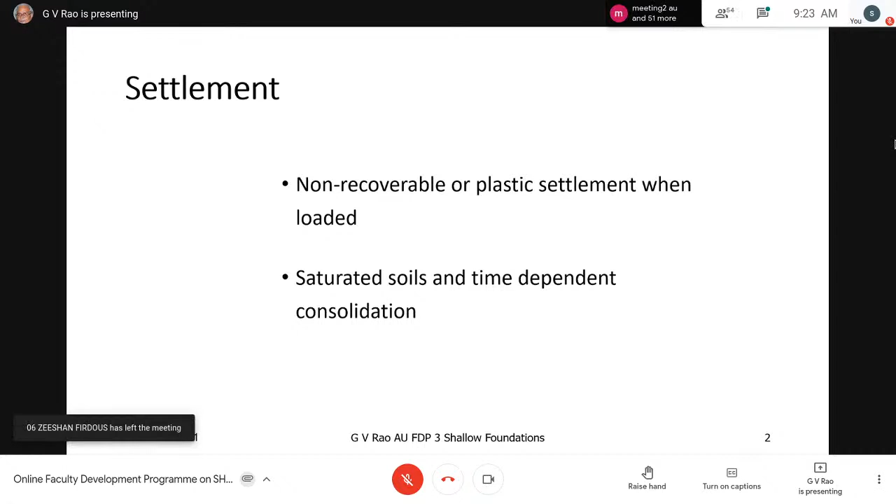So by common sense, once you start constructing a foundation on any given soil, we first have some immediate settlement, sometimes called elastic settlement. Then we also consider the long-term settlement, which by and large we divide into two portions: one which occurs due to dissipation of excess pore pressure, which we'll discuss in detail, and another part called secondary consolidation, which is more prominent in very soft clays and organic clays, which we are not focusing on today.

That means even if the soil is the same kind throughout the entire structure, we may still have causes for worry, which we have to take care of to minimize cracking and other distortion. And of course we have the classic case of the Tower of Pisa, where we know the soil below is not really as uniform as we expect it to be.

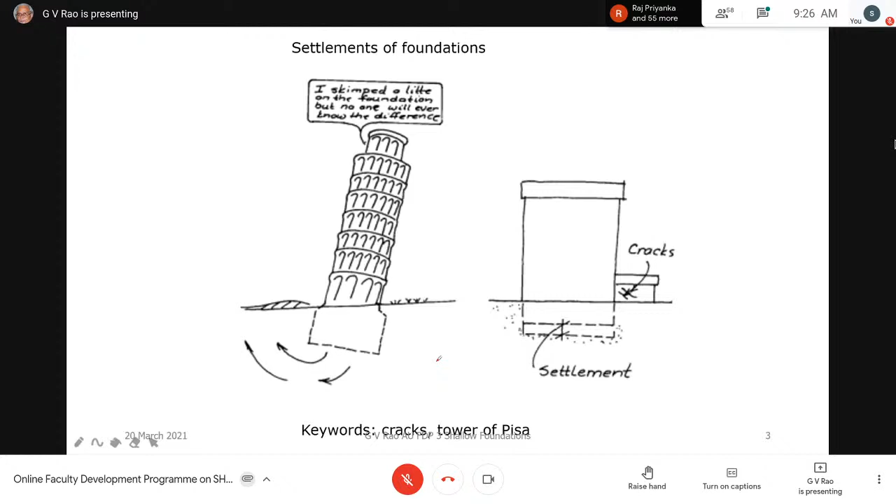So again, I am showing you the actual Pisa Tower, which I just talked about. But what we find is that in the Palace of Fine Arts in Mexico, if you just search on YouTube or Google, you will find so many pictures and write-ups on this. The point is that this structure, Palace of Fine Arts, constructed 100 years back, is still settling. It settled, I think, by a few meters. The structure itself, nothing happened, but we will see what all happened towards the end of this presentation.

So the point is that we can't have differential settlement, we can't have too much settlement either. So how do we control this? How do we make the structure as expected to be? Is it something very important? Is aesthetics important, or is the function going to be important? And is the economy going to be important? All of them will come into picture when we decide this.

So this settlement, which we normally call consolidation, consolidation really means in a saturated low permeability soil, that means obviously clays, under external loading, it is about building up the effective vertical stress by dissipating the initial excess pore pressure through drainage. Now what exactly does this mean? Once you place any load, of course our foundation in the present case, on a soft clay which is saturated, that means obviously there's a water table.

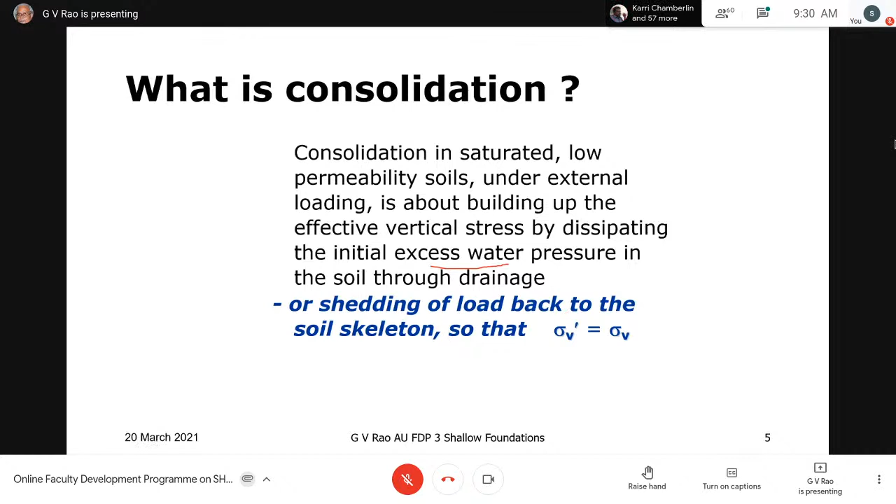The second aspect is the long-term response under constant load, that means the load has to be permanently there on the soil as foundation. Now what are the kinds of loads that are going to be on the soil as foundation? Of course, one is self-weight, the structural load, and then we also have live load, seismic load, and wind load. Obviously we want only that permanent part of the load which is going to cause consolidation. If it is infrequent, like a wind load occurring for a day or a month, it's not going to cause consolidation.

It's the permanent loads which are going to cause consolidation. In fact, the IS code defines it as service load. What is the service load element? That dead load which is going to be permanent, and part of this live load which is also going to be permanent. That means a fraction of that live load, let's say 50%, we take as a permanent load now. That means it becomes service load.

But this 50% business is not going to be true when we build the IIT library building, because library building means we've got racks and racks of books. All the books in the rack is actually only live load. But then this load is so heavy that probably in that case you take 90% of the live load as part of the service load.

This is something we have to remember now. The judgment we have to exercise is in trying to see what loads we use earlier for bearing capacity determination, and how much of them are going to be permanently placed on the soil in order to cause the settlement or consolidation. Despite the low permeability, the soil will drain, of course, over months, it could be years. We already said that, and this is going to cause reduction in the void ratio.

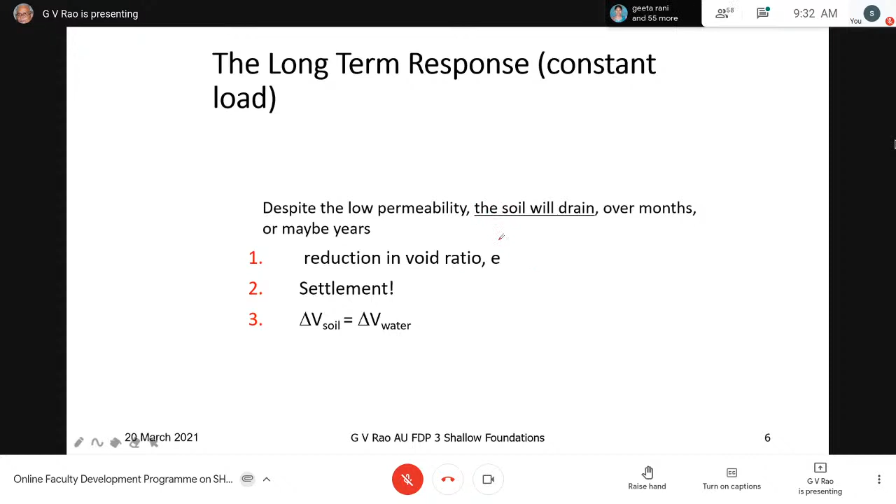Once void ratio reduces in saturated soil, it's going to cause settlement. The most important thing we have to realize is that settlement is caused by reduction of void ratio. Void ratio reduces because the excess pore water pressure is released by the actual flow of water to the outside, to a permeable layer. So the volume of water which exits is going to be equivalent to the change in the total volume of the soil element we are considering. That is going to be very important.

Now, when it's all vertical only, naturally it is leading to one-dimensional consolidation. We should realize this may not always be true, that the pore pressure dissipated in the vertical direction may also dissipate in the lateral direction. So in rare cases we also consider 3D consolidation. But one of the most common assumptions we make while using Terzaghi's theory, which we'll come to very quickly, is that we are talking of one-dimensional flow.

The water is going to flow in one direction, the vertical direction, either to the top or to the bottom, or to both top and bottom, depending on the various drainage layers. And the next thing is that it is going to be one-dimensional, meaning it moves only in the vertical direction, not in the lateral direction.

So if you are placing loads on the consolidated specimen slowly, step by step, as per a defined load increment ratio, naturally consolidation and settlement will occur. But if you suddenly place a load, the soil is not able to take it, and naturally it's going to squeeze out. The same thing will happen in the foundation also, where the squeezing out is obviously an issue of bearing capacity failure. So we should realize these two are happening simultaneously.

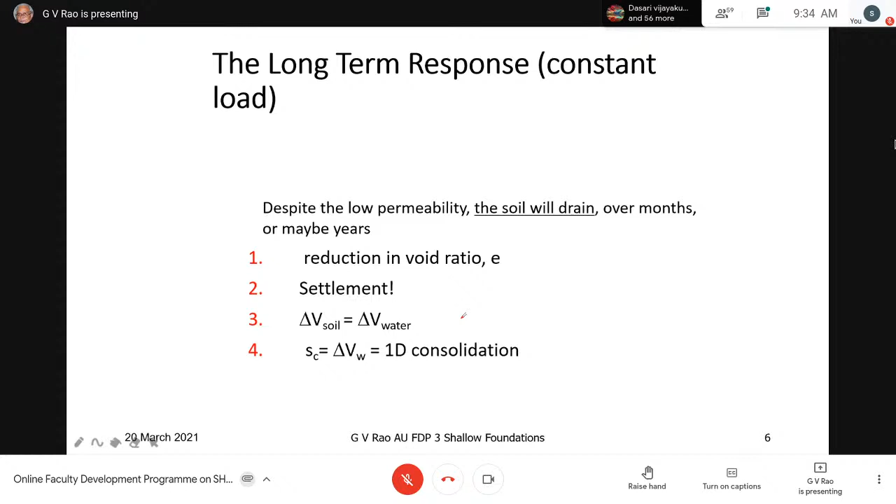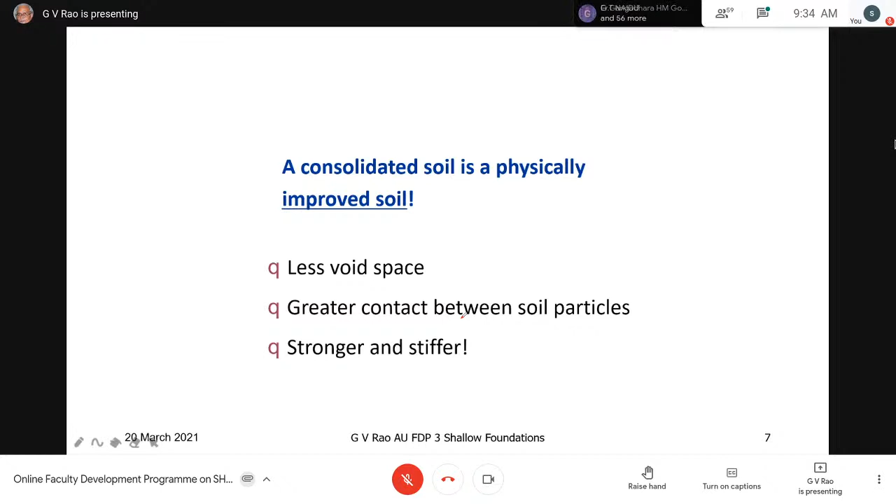Once you consider this, after consolidation, as I mentioned already, the soil is improved. It's physically improved soil. It has definitely higher frictional, higher strength parameters than it was before because it's got less void space, and the particles are coming nearer now. So loosely speaking, it's always going to be stronger and stiffer. Both are coming into picture now.

That is measured by placing the soil sample in an oedometer, or consolidometer as we commonly call it in India. Now what is the specimen size here? It's a few centimeters, and maybe the diameter is also a few centimeters, perhaps 5 centimeters or more. There are some standards specifying the size of the specimen.

That's why the consolidation test becomes most critical for all of us. Even for a standard consolidation test, it will take at least 2 weeks if you follow all the norms specified by researchers and the code of practice, the method of test given in our IS code. Obviously you can't give a result like a consolidation test in 3 days. I had an experience recently from one of the areas, very soft soil, and someone got the result in 3 days. I said, everybody gets results in 3 days now? There is no way of doing a quick consolidation test.

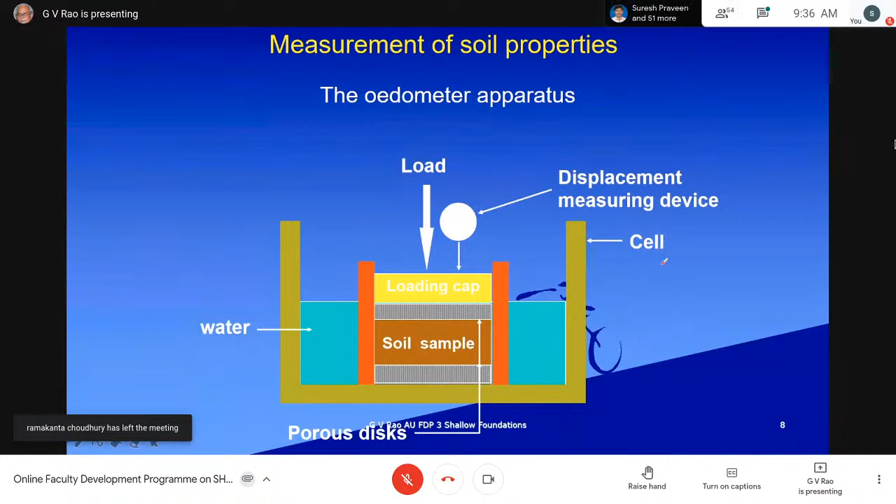Here are some basic drawbacks. Once you place the load, immediately there is pore pressure development, and slowly the excess pore pressure is going to dissipate. In the sample, if you've got porous stones on top and bottom, the excess pore pressure from the center will try to migrate towards the top or bottom. So there's an intermediate level of pore water pressure, and on the surfaces it becomes zero instantaneously. The moment you apply the load, the excess pore pressure is uniform, same from top to bottom through the middle layer. But instantly after that, because the top layer touches the porous stone, that pore water pressure becomes zero instantaneously, and then it takes time for it to dissipate completely throughout.

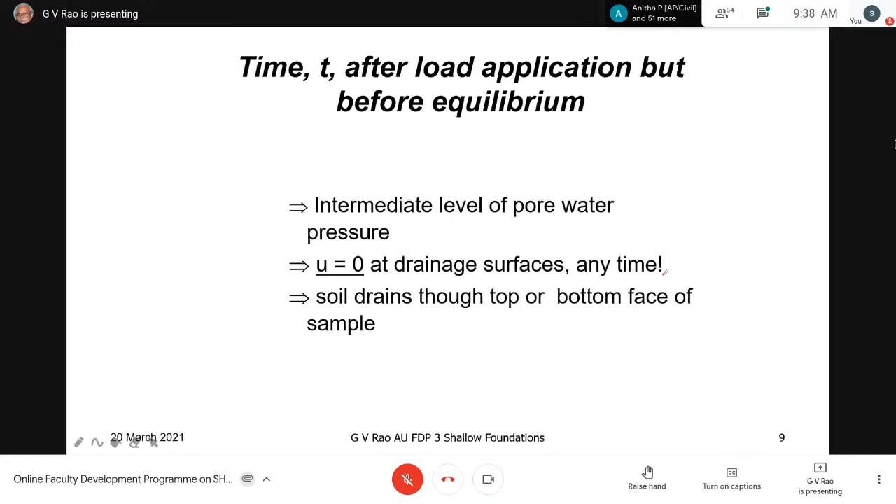So there's basically a phenomenon occurring within the soil sample unknown to us, depicted only as water goes out and settlement occurs. We're measuring settlement, not really the movement of the pore water pressure, because we're not measuring pore water pressure or the actual water coming out. We are measuring indirectly through a change in thickness, which is what we started with. The amount of water getting out causes the thickness change because we have a specified volume of sample. So the maximum drainage path is very important.

In the laboratory, we always keep porous stones both top and bottom along with filter paper, but in the field it may not be so. If you have a draining surface both on top and bottom, we say that for the middle of the sample, the excess pore pressure has to travel half the thickness to reach the top or the bottom, but in the field it may not be that way.

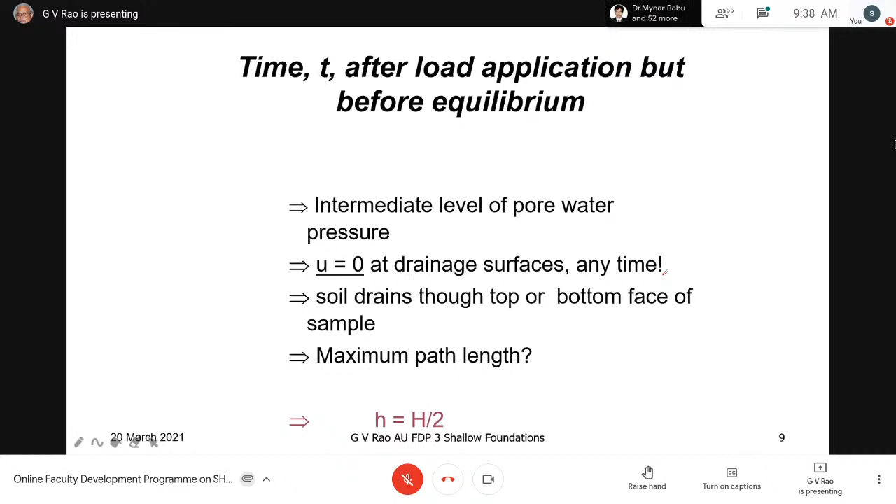Maybe you got only a drainage layer at the bottom only. So the path, the length the excess water pressure travels to get released, is going to be equal to the full thickness. That becomes also a very important point for us now. So the thickness required for actual flow of water is going to be the full thickness, when small h equals H, meaning the full height or thickness of the sample.

What information are we going to get from this test? At each stage, when we apply a small load, we are interested in the time rate of consolidation. We take time versus compression readings once we apply the load, for all loading stages, until the settlement being measured is no more there. Then we apply the second load, and then the third and fourth load increments. At the end of each load application, where no more settlements occur within that stage, this gives you the compressibility of the soil, and also through the overall behavior we can see whether the sample has been pre-consolidated in its previous history.

That means we are going to get three kinds of results from this. One is how long it takes to consolidate for a given load increment. The thickness change we get indirectly reflects the compressibility of the soil, and whether the soil has been pre-consolidated to pressures more than the existing overburden pressure.

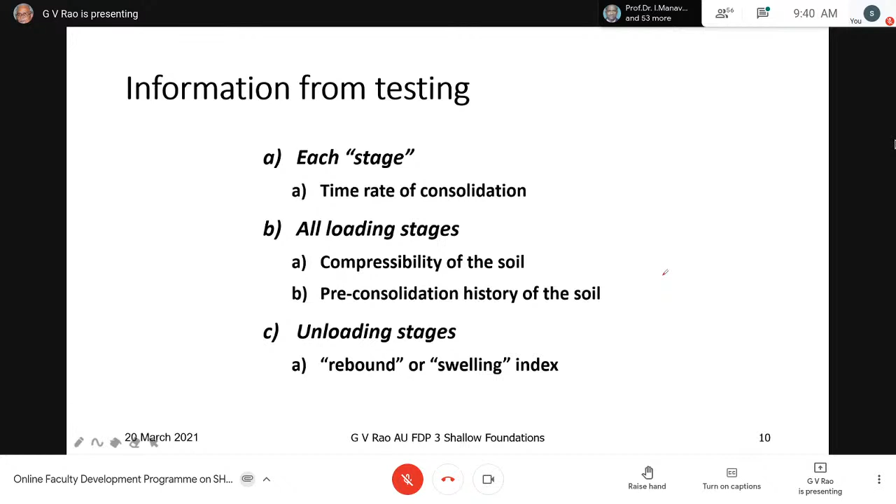In some cases, there is unloading also. After the soil at the top has been removed in the field due to erosion, the soil may start swelling, meaning it's going to rebound. The swelling is more if it's a swelling soil. In other cases, there is unloading so that the particles try to move apart. So there's always a rebound deformation which can be measured easily in the laboratory.

From the time compression results we are going to obtain what we call CV. From a fundamental viewpoint, CV comes from the theory of consolidation initiated by Terzaghi in soil mechanics. K is the permeability, MV is the compressibility factor, and gamma W is the unit weight of water. So CV is the index that tells us the time rate of consolidation, and that is the most important parameter to understand the time effect situation.

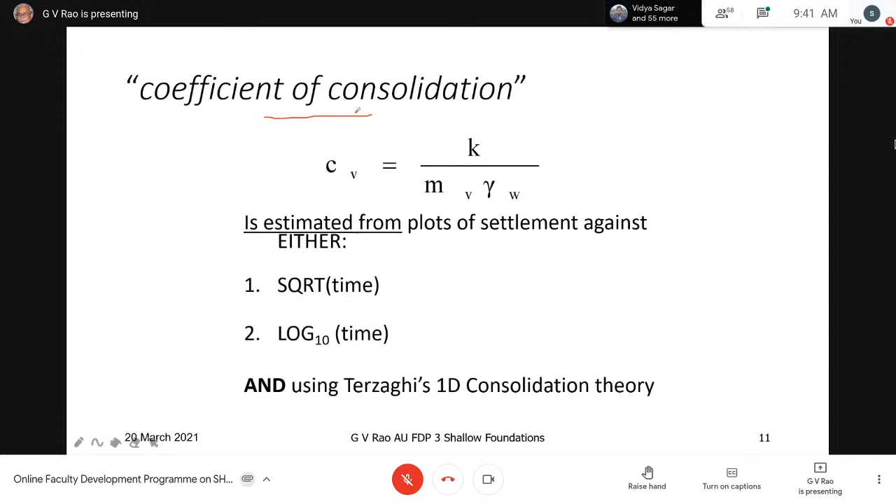There are people who use the square root of time method and the log time method. Most common is square root of time, and log is also used. The log method is used when the soil is very soft and when you are likely to have secondary consolidation also.

So what is happening now? The results can be plotted in different ways - this is the actual data directly. When you plot the data, we are plotting the root of time versus the compression readings we get. The readings are just plotted - you can see 5.500 like that, something is plotted. From the instant of loading, we are measuring the compression, the dial gauge reading.

We plot the root of time, not directly against time, because that is a phenomenon observed in theory by Terzaghi. So we start following that, drawing a straight line - I assume you know the details. We draw a line inclined at 15% more, and wherever it cuts, that gives us the time for 90% consolidation. So there's a geometrical way to obtain this value of time required for 90% consolidation, by this technique you can say, and the same applies for the log method also.

Both these methods have a relation with respect to theory also. Sridharan from IISc, who was my supervisor, brought out a new theory wherein we can also predict using hyperbolic relationships. These are classical ones. We can do an equilibrium prediction using hyperbolic information. The advantage is you may not have to really do the whole testing, so there's an advantage in the system.

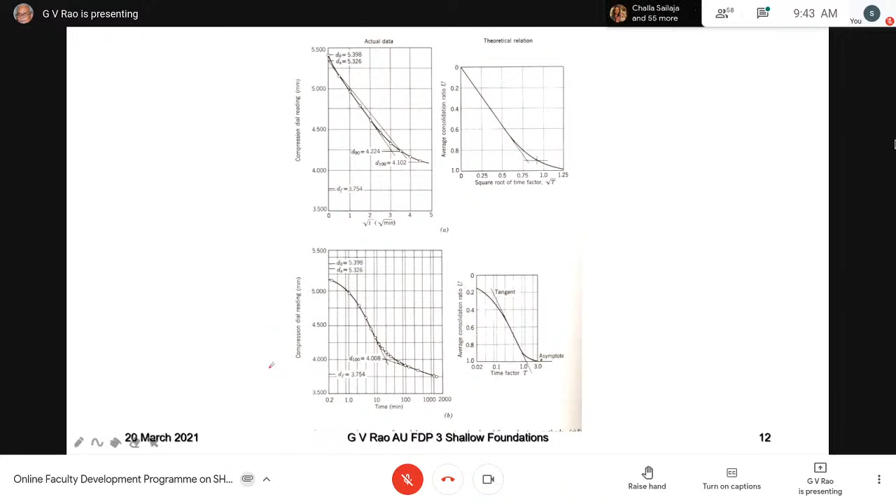By this process, using T90 or T100, we can obtain the values. The time factor comes from the theory of consolidation. T is time for a degree of consolidation which you require—say if it's 90% consolidation, then the time required for that. H is the thickness of the drainage path we said earlier. So from this, knowing T from theory, we can get the value of CV.

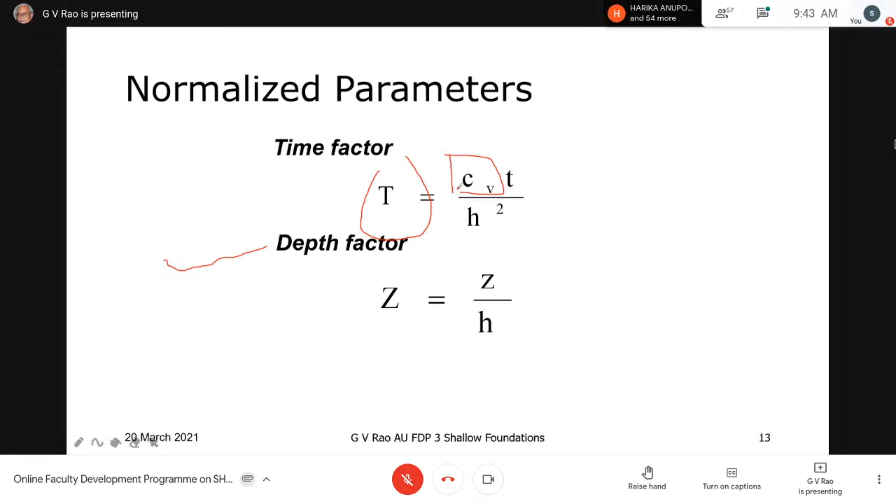This is most important for all of us to understand the time relationship between the settlement or consolidation in the field, which we expect. I already mentioned that H depends upon the length of the drainage path. So the next thing we are going to look at is basically coming out from this.

From this kind of test, we can also estimate, naturally, at the end of each load increment, the amount of settlement. For each load increment, we are going to get the settlement. That is what we use to begin with, but you use it with theory also. We'll come to what theory we are going to use for this.

The theory says that the moment you apply any load on a system, we are going to have settlement—we call it immediate settlement, or elastic settlement. It takes place during or immediately after construction of the structure. It's also known as distortion settlement, as it is due to distortions within the foundation soil. In the laboratory also, distortions do occur. So what we are looking at is immediate settlement, which is obviously elastic in the case of sands—that may be the only settlement which occurs there.

The second thing is consolidation settlement, which occurs due to the dissipation of excess pore pressure—meaning gradual expulsion of water from the voids in the soil. That is obtained using the experimental data and the consolidation theory propounded by Terzaghi.

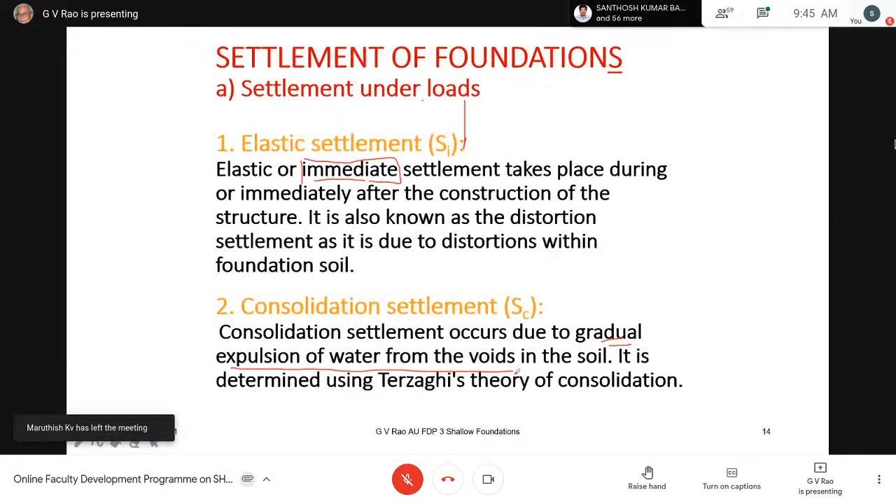The third aspect: in some soils, consolidation is not the end of the primary—that's why the earlier one is called primary consolidation, and more often this second consolidation is called secondary consolidation. Even if the excess pore water pressure becomes zero, settlement continues. Some say it's due to creep; some say the secondary consolidation movement is still occurring. This is not always significant—it's insignificant for normal soils, only significant for organic soils. Most theories are not applicable for organic soil, so we deal only with inorganic soil.

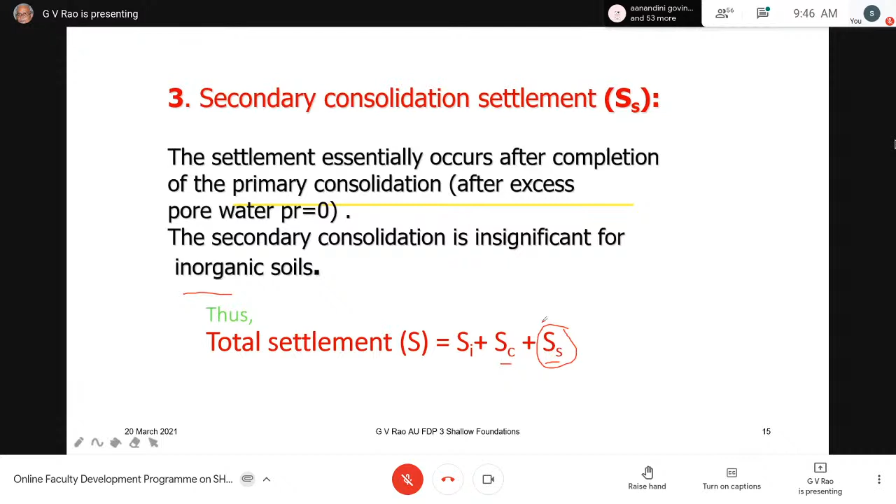Theoretically, total settlement is simply the addition of the immediate settlement, the consolidation settlement (primary consolidation), and theoretically secondary consolidation, which we don't normally consider since we're not dealing with organic soil. So we only have the initial or immediate settlement and the consolidation settlement. But there's also scope for settlement due to many other causes.

In some cases these other causes may exceed whatever we already thought—it could be collapse of the soil. There are certain kinds of soils called collapsible soils, so unless you're dealing with them this may not occur. Also, sometimes underground erosion or piping can occur below the foundation, and it also occurs due to lowering of the water table.

Lowering the water table actually increases the effective load on the foundation soil, and that can cause settlement. This can be theoretically calculated, and most of you who are teachers give questions on this for assignments or exams also.

Sometimes thermal changes cause issues too. Suppose we have workshops producing heat - the water is going to evaporate, and there's a problem. In other cases, consolidation will not occur if it's cold storage.

Also due to subsidence of the total area - in places like Dhanbad, due to excess mining done below ground level, the entire city or township is settling. This is called subsidence. It can also occur in cities where there are cavities due to removal of lime by action of rainwater and carbonation, sometimes causing lime caverns. In a place like Delhi, caverns were found just below the road.

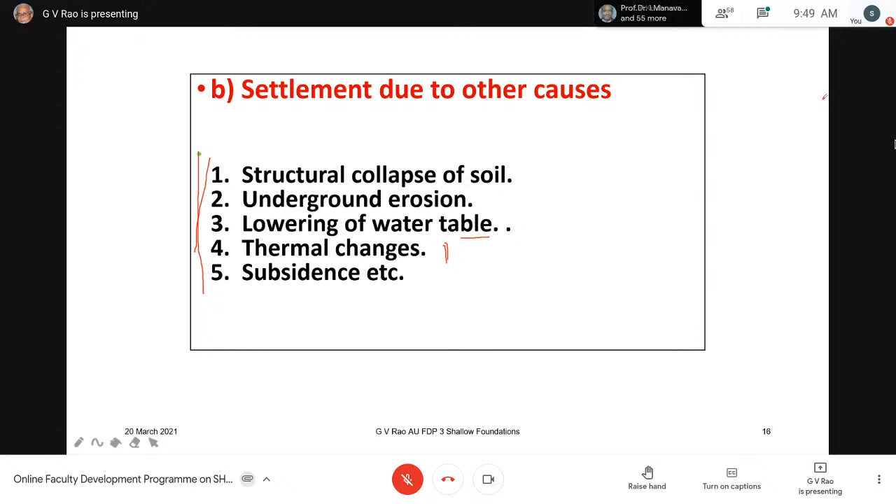And it is due to these and many other reasons that whatever value you calculate by any theory may be off the mark by sometimes 2-3 times. That means the settlement you calculate by theory could be much, much less or much, much more than the actual observation.

So the result you get by taking settlement readings of the soil sample in the consolidometer - we can plot this with respect to what we applied, the effective consolidation stress, because we take the measurement of thickness at the end of loading, at the end of consolidation of the loading. That becomes the effective stress or effective consolidation stress.

In the other direction, we talk of strain - that means settlement divided by thickness. That's one way of doing it. If you plot directly like this, the curve will be something like this. But very rarely do you plot this way.

You always plot the effective consolidation stress versus void ratio, which is easier for us, because that's easy to calculate the settlement. When you do this, you get a kind of curved behavior. Mind you, this is not always in linear scale, it can be in log scale also. So if you plot like this, one axis is percent consolidation - percent vertical strain - and the other is void ratio versus effective stress.

So that is the kind of picture we are going to get. We can have a direct kind of behavior, or we can plot versus the log scale. Mind you, the picture I gave earlier is on the linear scale actually, so this curve we get is definitely curved.

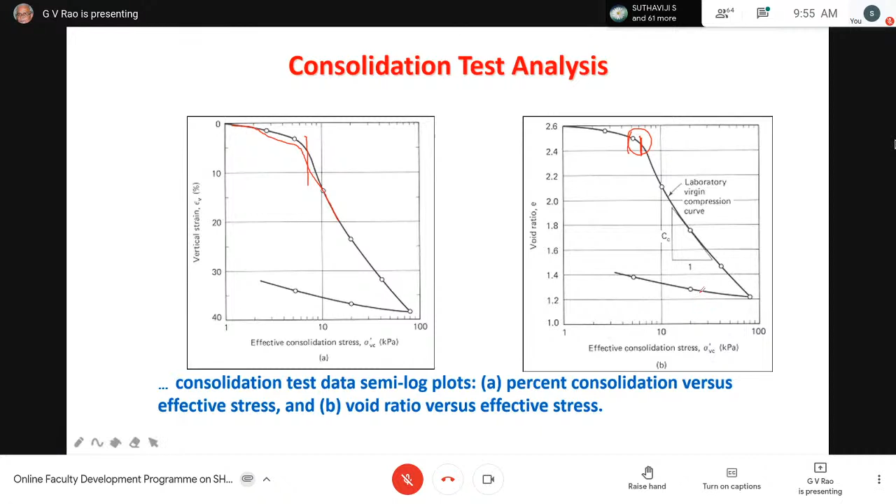First time the loading is applied - this change is what we want to find out, and this is what we define as the pre-consolidation pressure. So we get the slope of this portion, and we also get the rebound values in terms of CC, MV, or AV, whatever it is. The point is we get the total consolidation behavior - how much settlement will occur at what kind of loading - from this e-log curve, and that becomes the basis for all our work.

So when we plot the same thing now, without much consideration, I have taken a sample from here, at this pressure. Now I know from calculations of the loads which are going to be placed on the foundation, and the stress coming at the level of the layer of soil which is going to consolidate. Once you calculate the additional stress that's going to come because you placed the foundation, the stress could have become this much.

Going back on this line, earlier the void ratio was this much because that is the existing overburden pressure. You are going to apply additional load now because of foundation construction, up to this. So the difference between these two values of void ratio is simply giving me the strain, delta H over H. H is the sample thickness in the lab. In the field, H represents the thickness of the strata, and delta H is going to be the settlement.

By just looking at the change in void ratio between these two pressures and knowing the value of e naught, the initial void ratio we started with, we are able to get the value of delta H by H. Multiply this value by H and we get the thickness change, or consolidation.

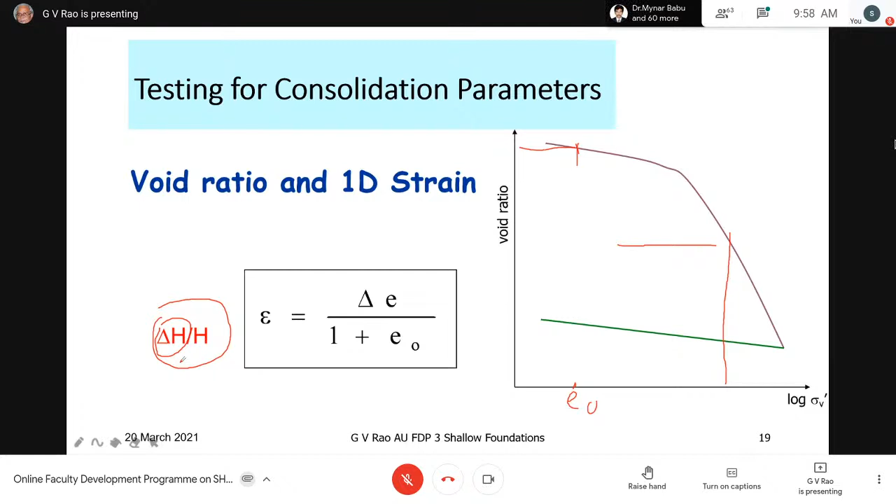There are no more values required. I just need the e-log curve. The other way of looking at it is I can also get the initial values before the so-called pre-consolidation pressure, and CC as well defined here. So all of these can be obtained by the indices, by the slopes.

So in this, we come back to our definitions. What comes out of these curves is a reflection of the stress history of the soil, the stress history of the clay. We're talking of NCC, meaning normally consolidated clays. We can have normally consolidated clays, over-consolidated clays, and also under-consolidated clays.

To begin with, a normally consolidated soil is one which has not been subjected to a pressure, an effective overburden pressure, greater than the existing overburden pressure. That means if the soil has been laid by sedimentation geologically, and the layers remain there for millions of years, each layer is going to be normally consolidated because it's subjected to consolidation under the existing effective overburden pressure. So all the layers are going to be normally consolidated clays.

In the other case, what happened? Probably geologically, the soil has been sedimented, each layer is fully consolidated because millions of years elapsed. But due to geological changes now, maybe the top 100 meters is eroded.

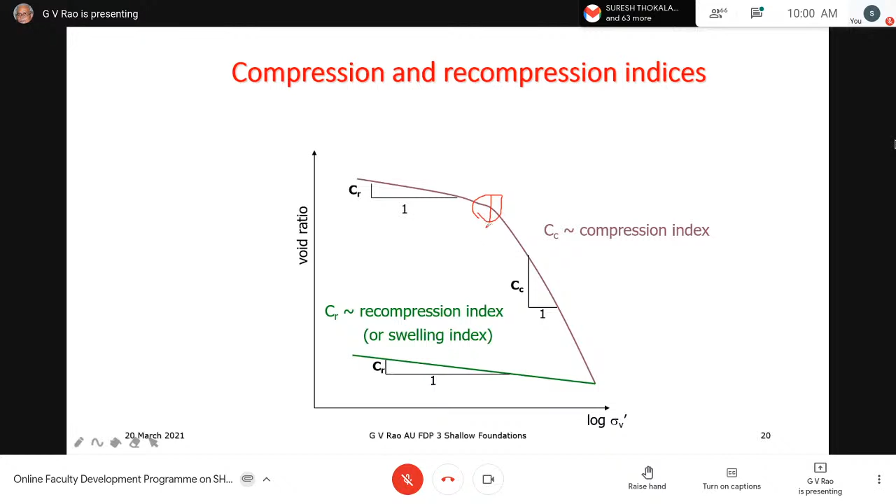We'll come back on this again. So this is what we're trying to say. This sample has been stiffer up to this layer, up to this part, and then has been softer beyond this part. So this is the pressure which is obtained as what we call the pre-consolidation pressure. Now higher is this pressure, naturally, the soil is going to be more over-consolidated.

We'll see that also. So then we come to the third aspect, which is not used actually, but in offshore structures this becomes very common in fact. So what is happening is, under-consolidation occurs in soils that have recently been deposited.

I will give a small side story. When we were investigating the offshore deposits of gas, both in the Krishna and Godavari basin, which are now very popular sources for all our gas, when the investigation was going on, the initial vehicles, initial ships, initial barges which were investigating, they were only barges to investigate the soil profile. What was happening was the strata at the bottom of the river, the seabed, was sort of flowing.

What do you mean by the soil strata flowing? After all, the strata was only at hardly an inclination of 4 to 5 degrees. That means a slope angle of 4 to 5 degrees, or less than 10 degrees, was actually moving like a slide. If you go back to the history of this, try to see how much sediment is coming out of the mouths of Ganga and Brahmaputra near Calcutta or near Bangladesh.

Near the boundary between these countries, what we find is that the amount of sediment coming out is something like 500 million tons, 550 million tons per annum. This much sediment is coming through the mouths of both Ganga and Brahmaputra. The nearest value to this is 350 million tons in the Gulf of Mexico. That means we have the largest deposits of soil sediment coming into the sea.

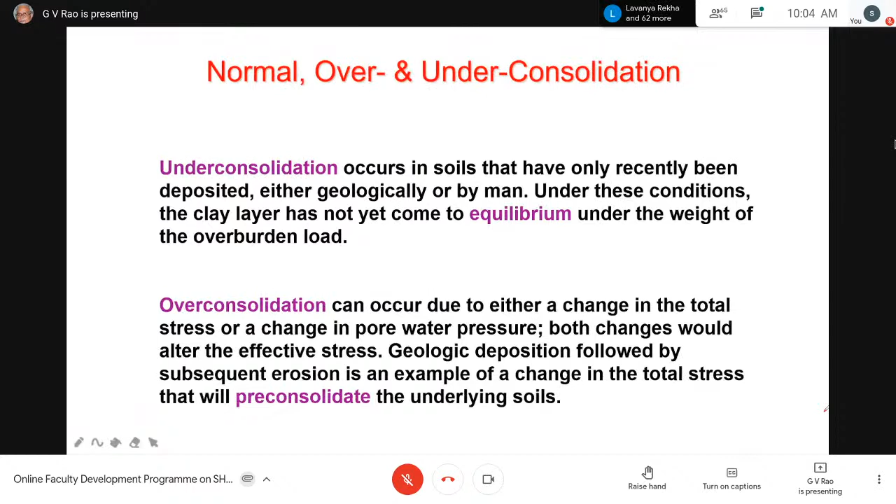So over consolidation can occur due to either a change in the total stress or a change in the pore water pressure. Both changes would alter the effective stress. So geological deposition followed by subsequent erosion is an example of a change in total stress that will pre-consolidate the underlying soils. If the line is only one single line, the soil is essentially a normally consolidated clay. If there is going to be a slope change, that shows the soil is over-consolidated, showing the pre-consolidated pressure.

One thing we should remember is that normally consolidated clays and over-consolidated clays are not different types of clays. They are the same kind of clays. It's only the condition of the excess water pressure dissipation which causes pre-consolidation to occur.

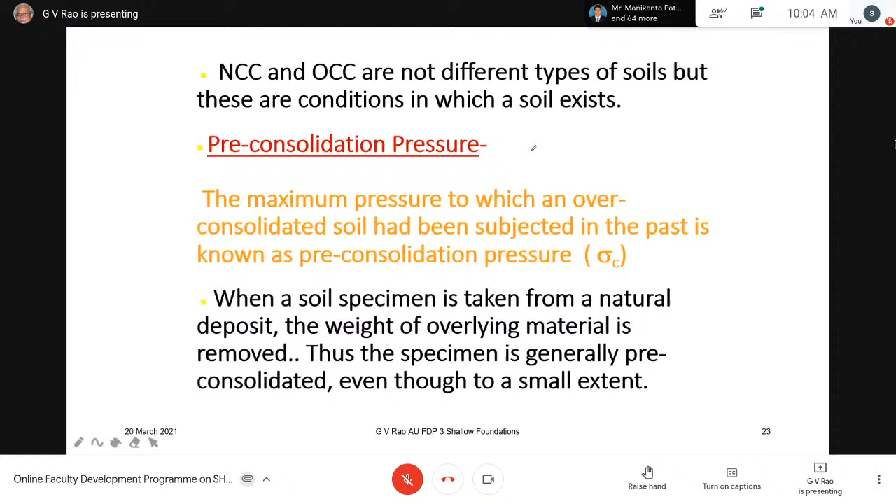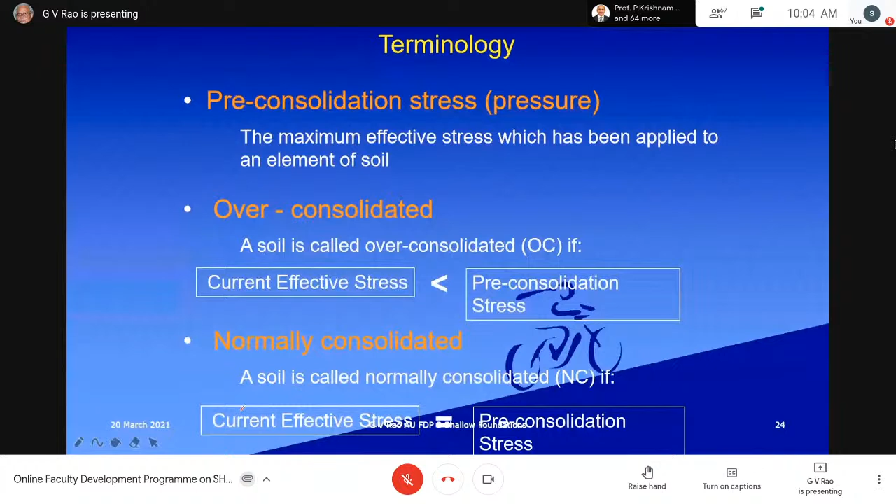The maximum pressure to which an over-consolidated soil had been subjected in the past is known as the pre-consolidated pressure. Pre-consolidated stress is the maximum effective stress which has been applied to the element of soil. For over-consolidated soil, the current effective stress is less than the pre-consolidated stress, and it is actually consolidated at the current effective stress. So pre-consolidated stress equal to effective stress is just a single line.

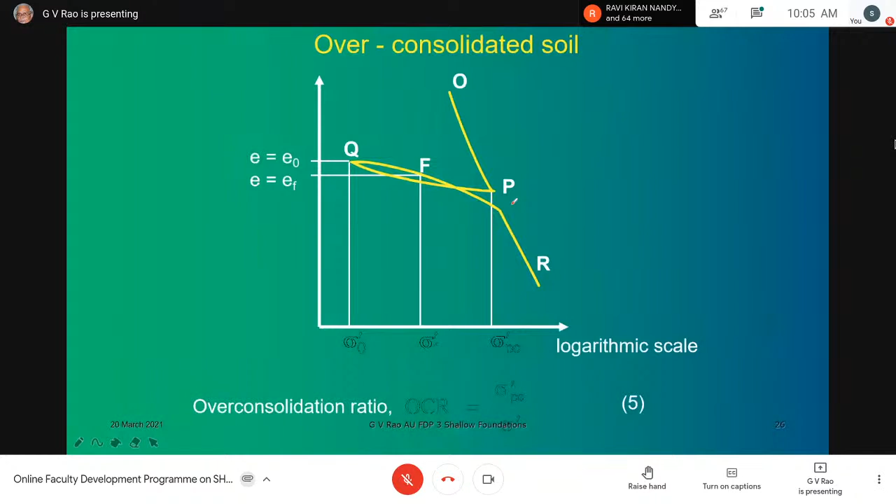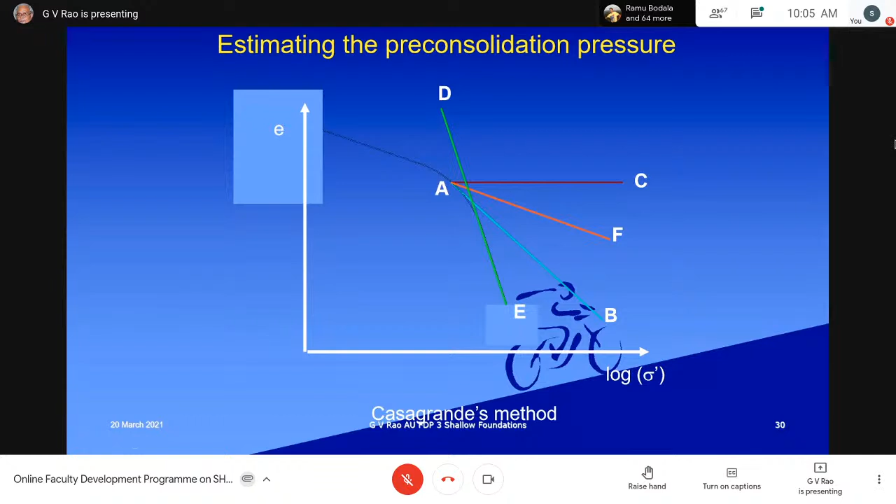This is the basic issue we are considering, and there are a lot of methods to do this, like the Casagrande method and others. All of you are familiar with those methods, and we can decide upon this. In fact, the best way is repeated testing, not the conventional way. But there are simple methods to obtain this, and as teachers you're familiar with these procedures, which are all empirical procedures to define these values.

We already defined the pre-consolidated stress, which means if your present loads are lesser than the pre-consolidated pressure, you will have lesser settlement. If the present load imposed due to construction of the foundation is more than the pre-consolidated pressure, naturally the settlement is going to be more. This is something we have to do, it's not in our control, it's a structure which we make. If the structure demands higher stress, we are exceeding pre-consolidated pressure and settlements will be more. If we are below the pre-consolidated pressure, the settlement will be less.

Yes? Any doubt, sir? Nice presentation. Hello? Nice presentation, sir. Are you able to hear me? Yes, sir, nice presentation, thank you.

So then the coefficient of volume change, we have already defined MV and other things, we are familiar with this. Basically AV is the slope of the line between void ratio and pressure, and AV divided by (1 plus E naught) gives MV. So they are only a simple relationship based on the slope.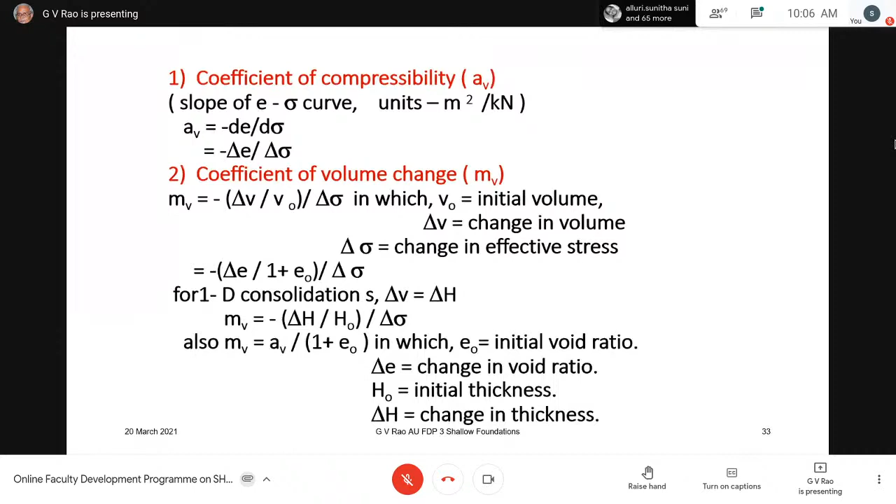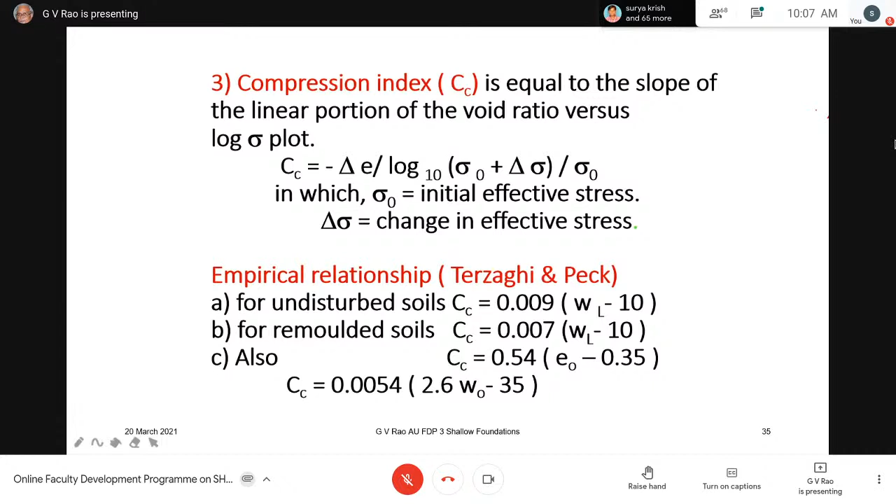After having got this, we can calculate using the plot as mentioned. We also find, as noted in our report, that if you can't conduct a consolidation test, for preliminary estimation purposes we can use available relationships. This is as old as three or four decades back, where CC equals a function of liquid limit, and also a function of the initial void ratio. Many such relationships exist, but I advise against using these because they are pure empirical relationships, and we can't use them for submitting settlement calculations for the present structures we are estimating.

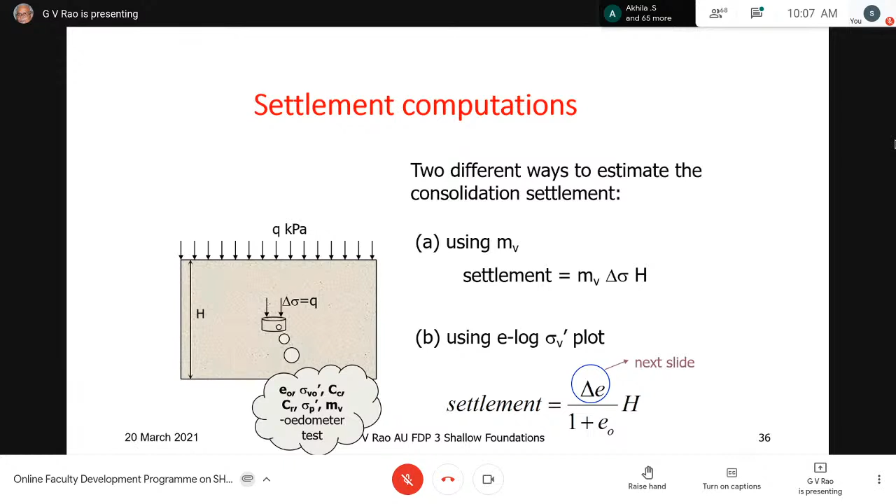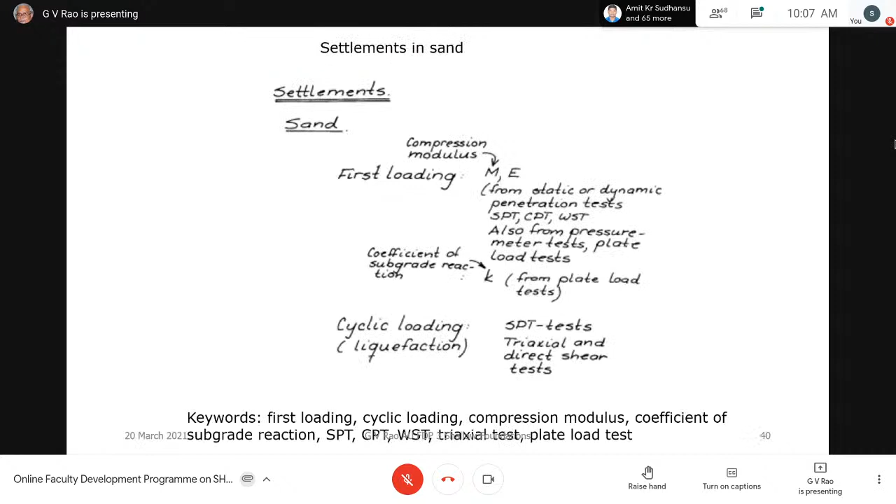These are pure guidelines only for guessing initially what kind of work we are going to do. So then, as I told you, we can use the equations or directly use the void ratio change and calculate this. We already said that for NC clay, settlement is a combination of initial, primary and secondary settlement, and all of these are well known today. We'll quickly skip to that.

Then comes calculating the stress change. To calculate stress change, we can use theories like the Boussinesq theory, the Westergaard theory, or the Burmister theory. But whatever theory we use, fundamentally the load placed near the surface of the ground is going to distribute in the form of a bulb, so this entire soil is going to contribute to the settlement.

Depending upon the situation, the thickness of the soil, which is the main influence, is going to be varying. It depends upon many things, including whether it's a spread footing or a strip footing. We can really try to see the influence of this.

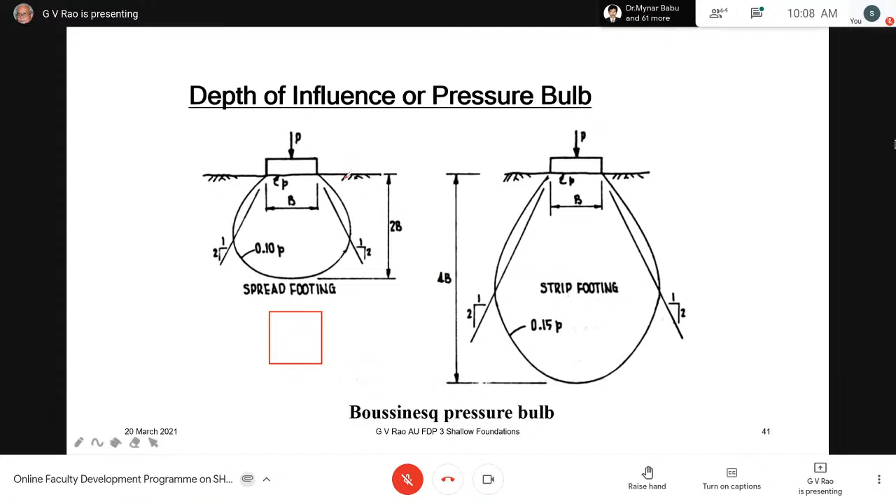If it is a strip footing, we find that the influence is going down up to 4B. In the case of a spread footing, it's only going to 2B, where B is the width of the footing. You can also calculate and prove these yourself; you don't have to go by theory only.

But it's difficult to calculate the bulb because the shape is not so clear. So people assume the distribution occurs in a trapezoidal form, and 1:2 is a very common way of doing it. If it is a spread footing, it's spreading in all directions, so B becomes B plus Z, and L also becomes B plus Z. The same thing happens with strip footing.

A strip footing, as you know, is something like a plane strain - we will see that later. The point is that one has to consider this kind of distribution for simplicity, though this is not perfect.

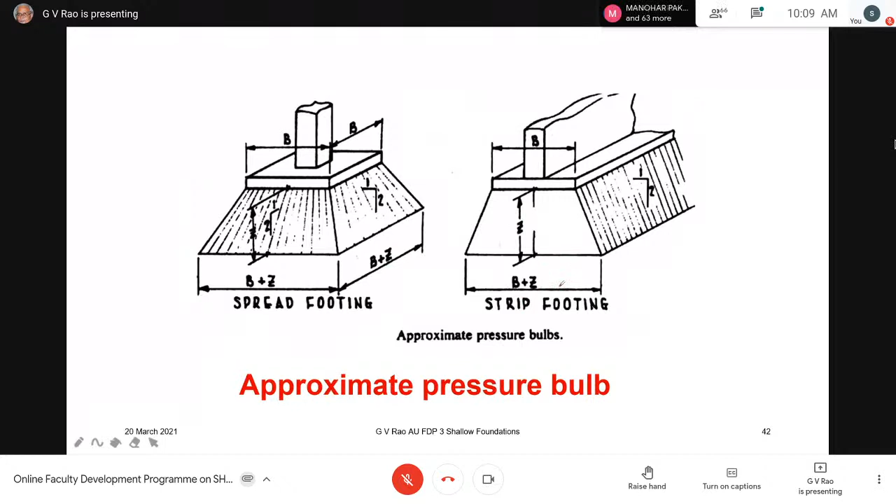Once you do this, if our layer is somewhere in between, we will find out what stress change is occurring here.

Another important thing to always remember: if the foundations are small like this, the zone of influence is going to be this much only. If you have a large foundation like a raft, the zone of influence is going to be so much more. So having small foundations quite near each other is going to influence the settlement in a major way.

If you calculate individual settlement of each column or each foundation separately, it is actually wrong, because they are so nearby that they will act together to cause settlement in the entire pressure bulb.

In the same way, in stratum 1, there is a distribution, and the top portion of it is going to be nearer the foundation. We will have a thicker layer and a thinner layer, and as the stress decreases going down, maybe I'll have a thicker layer here for calculation. So it's never calculated as though it's going to be one single layer - it will be divided into multiple layers because the relationship is not linear.

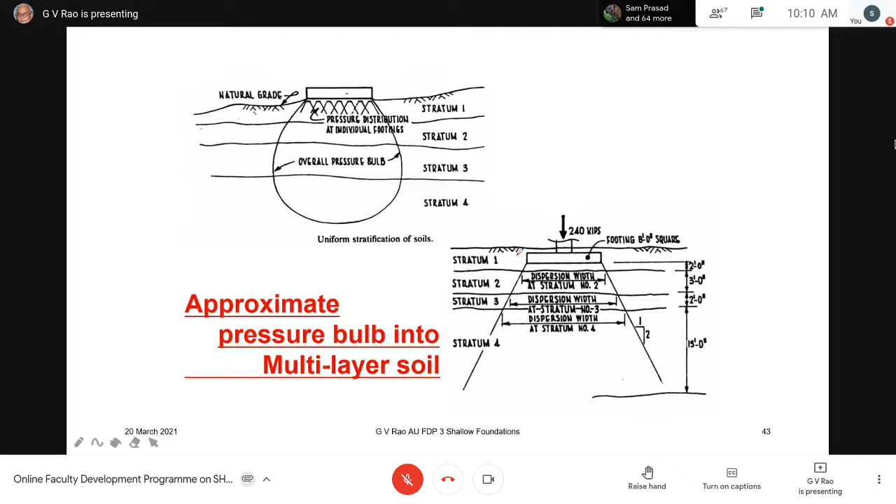We should divide them into multiple layers so that we get an accurate value - that is most recommended. I'll repeat: the layers nearer the bottom of the foundation are always assumed to be thinner, and as you keep going down, we can assume thicker layers, even if the soil is the same kind.

This obviously means we are going to have consolidation data for each of the kinds of layers present. Stratum 1 in this case might be sandy soil, but stratum 2 could be different from stratum 3 and stratum 4, so we ought to have consolidation data in each one of the layers. Just taking one sample in one stratum is not going to give an indication because these soils are very different - for the same borehole, you have to do a number of correlations to get a field value.

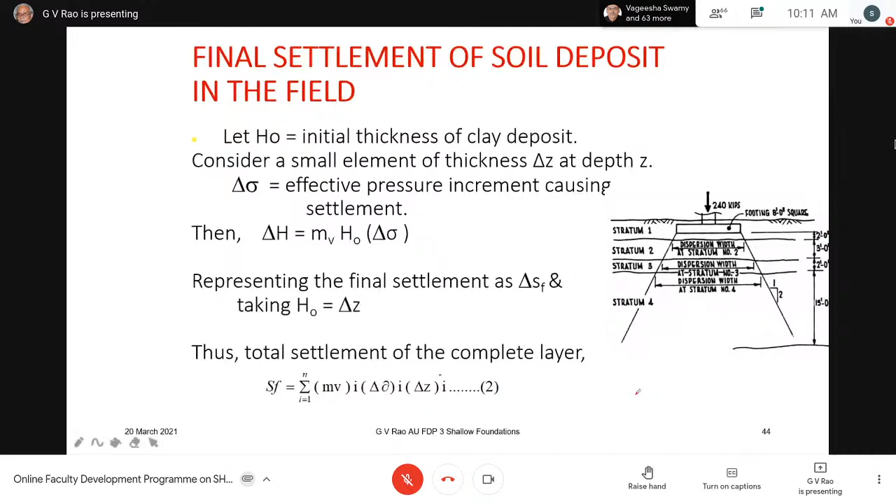So then we can always calculate what the settlement actually is, by elastic settlement or vertical settlement.

So that initial or immediate settlement is going to be a function of the kind of load you are going to have, the width of the foundation which you are considering, mu of the soil, the modulus of the soil, and the influence factor which is going to be considered. The influence factor comes from elastic theory, and mu we are going to assume.

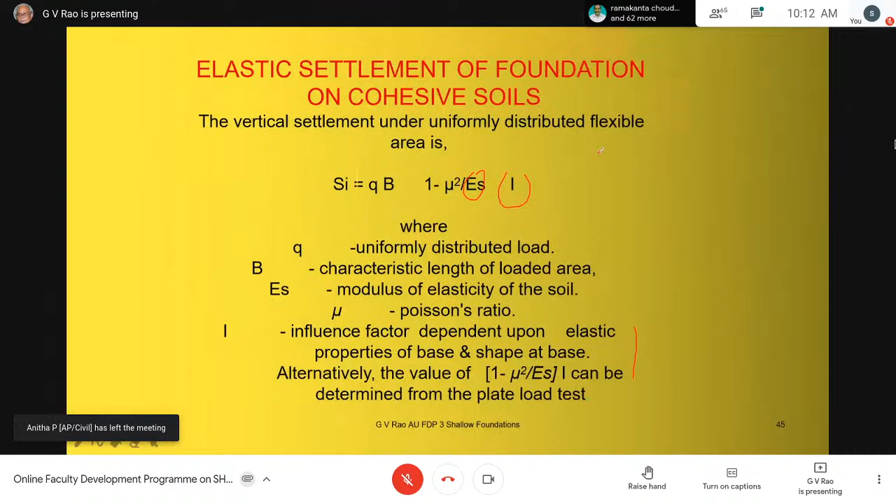E, of course, we need to conduct a triaxial test to find out the slope of the line for each confining pressure. Q is something we know, and B is what we're assuming to begin with. So the vertical settlement can be obtained using this formula, and of course our standard, IS 8009, also gives you these values. So this is a common reference to all of us.

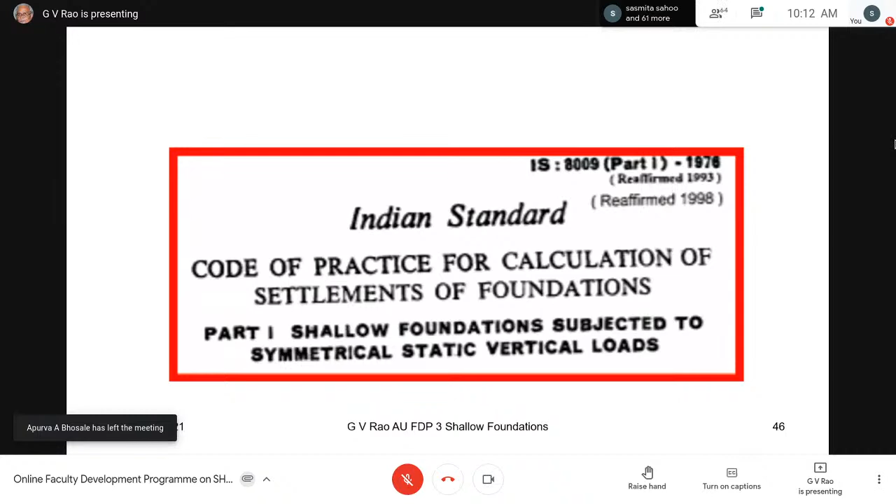It's being revised continuously, and we can calculate the settlement based upon the DCP, dynamic cone penetration test, also. We can do it using many other things, like SPT also. For this, if you're using SPT, these are the curves.

Probably you're familiar with these curves also. On this axis we have the width of the foundation, and the settlement for different kinds of foundations. This is again on the log scale, you should realize this. The vertical axis, settlement, is on the log scale, and the correction factor for water table is also given clearly. What is important is that this is 10 to the power minus 1 and 10 to the power minus 2, settlement in meters per unit pressure.

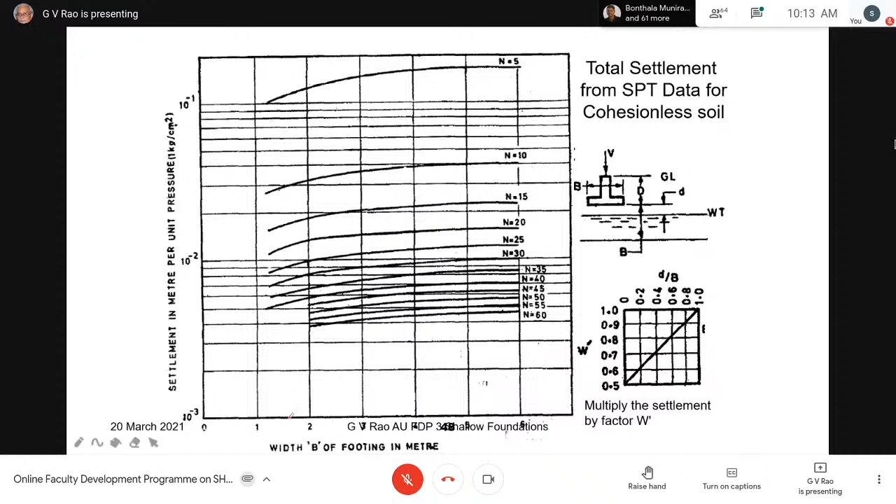That means per each kilogram per centimeter square. So you see that when the SPT N value is low, naturally the settlement is going to be more, and as the N value increases, the settlement is going to be reduced by one order. So the order is important. This is on a log scale. This is what we have to remember. Obviously this is only the settlement that occurs in sandy soils.

Now we can also calculate the consolidation settlement using the same theories. As I told you, the code also gives you approximate values of Cc, but I will resist you from using this because it's only a pure estimate based on experience, nothing to do with the soils being considered at a given site. This is giving you clays now.

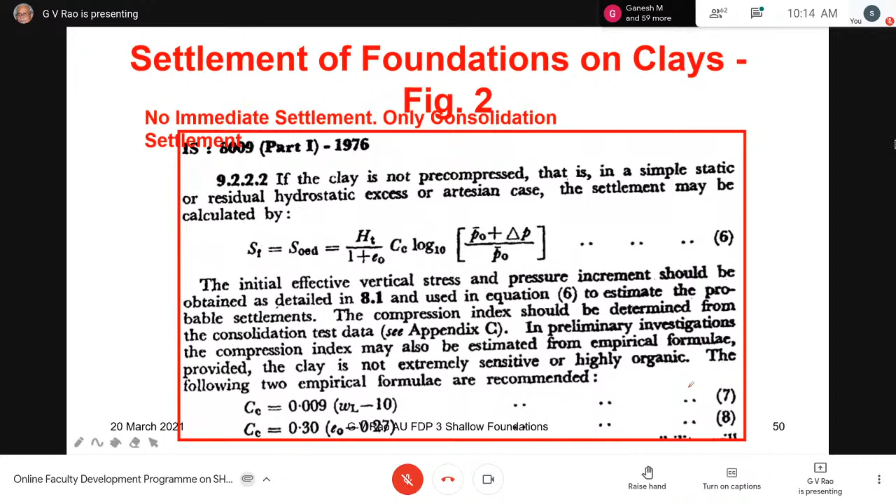In clays, one way of looking at it: for most practical purposes, when you conduct a consolidation test, we draw that line. The initial portion is going to be considered as immediate settlement. So when doing this settlement, in most cases, I for one will take the settlement calculated by the theory, because we are only going between one load increment and another. I will take it as the settlement of consolidation as well as immediate settlement. That is the way most people do it.

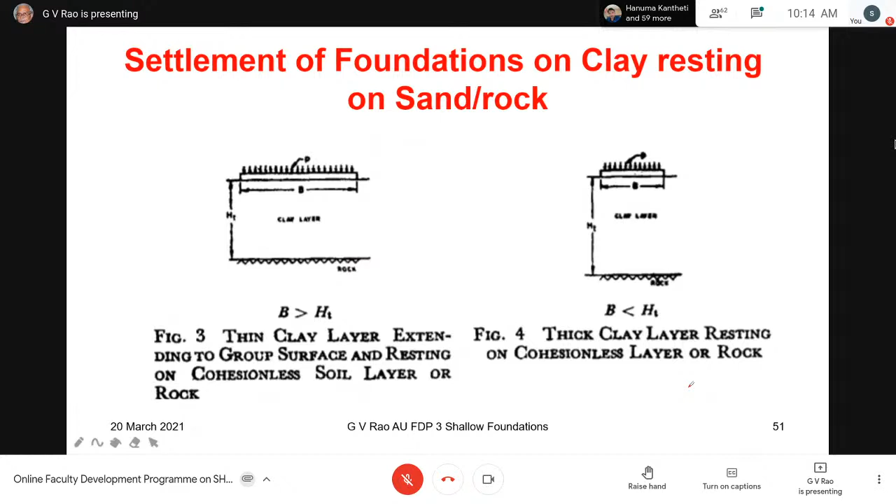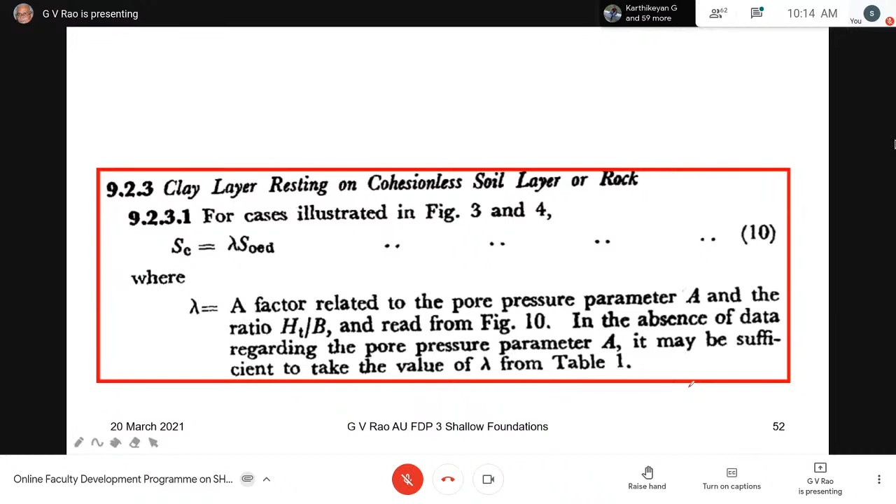For all these kinds of cases, the bottom layer could be very thick or it could be thin. So the values I'm going to get for a cohesionless soil, we are going to consider also the effect of H over B, for which we take the lambda value. So what does this represent? This gives you the pore pressure coefficient.

What is the pore pressure coefficient? For this, we have to conduct a triaxial test, specifically a CU bar test, a consolidated undrained test with pore pressure measurement. When you do that, the pore pressure is measured, of course, right up to failure. So we have the pore pressure measured at failure, and we also know the deviator stress at failure. The pore pressure value at failure divided by the deviator stress at failure gives you the value of the pore pressure coefficient, Skempton's pore pressure coefficient A.

That value, they say, is usually between 0.5 and 1 for normally consolidated soils, and less than 0.5 for over-consolidated soils. For sensitive, under-consolidated soils, it is between 1 and 1.2. These values have been given for finding out the settlement coefficient lambda.

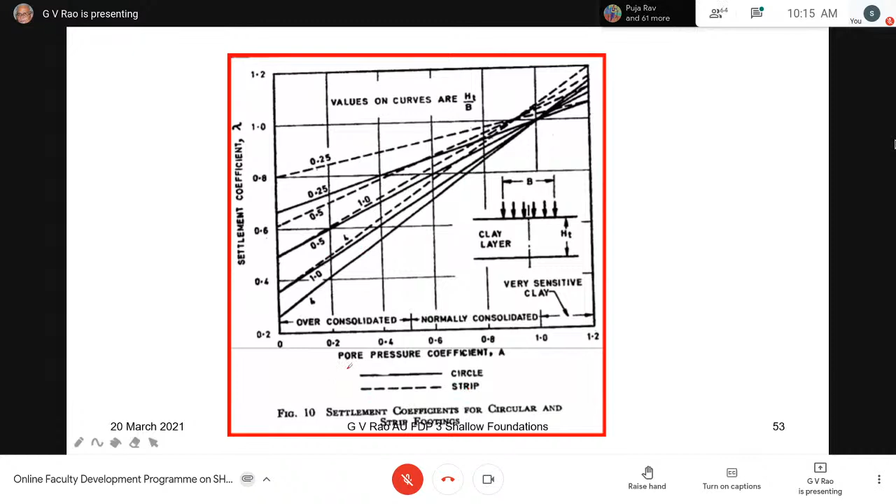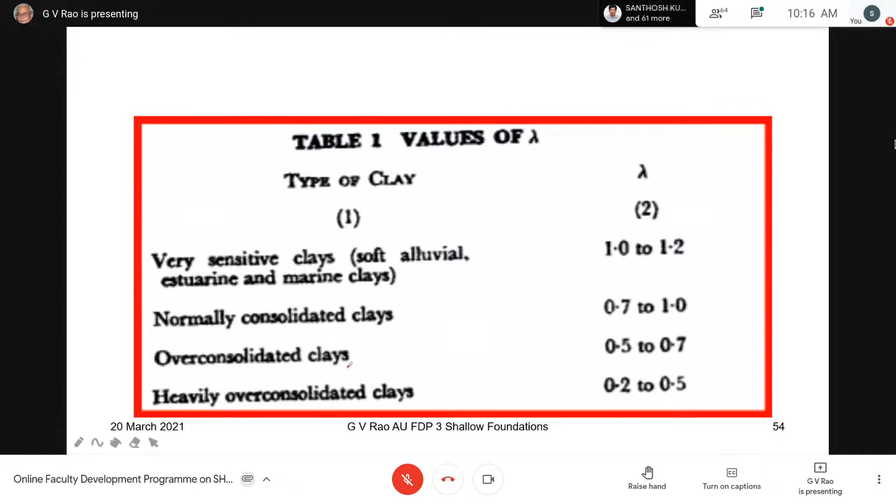This lambda also depends upon the shape of the foundation, circle and strip. This is what I defined now. So this value of lambda we have to interpose in the settlement we are going to get for cohesion soil. So if you can't conduct a triaxial test, the code gives you another view, giving you these values. So for different kinds of materials, it gives you the same range actually.

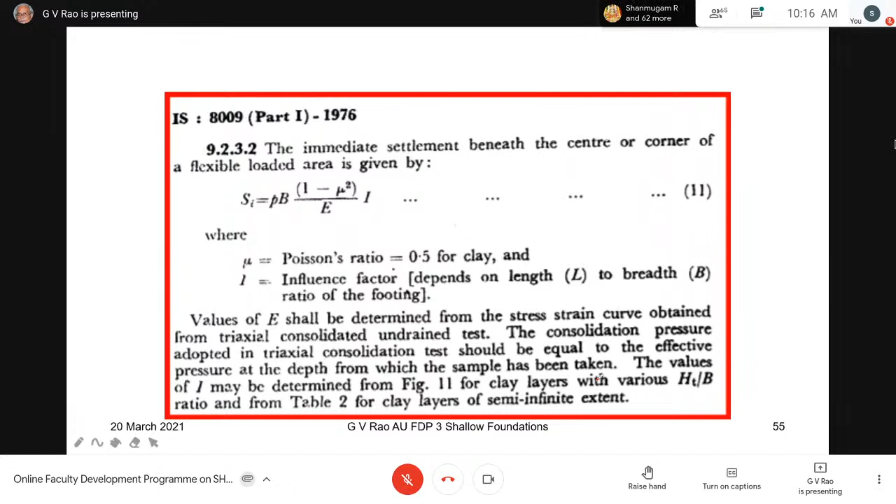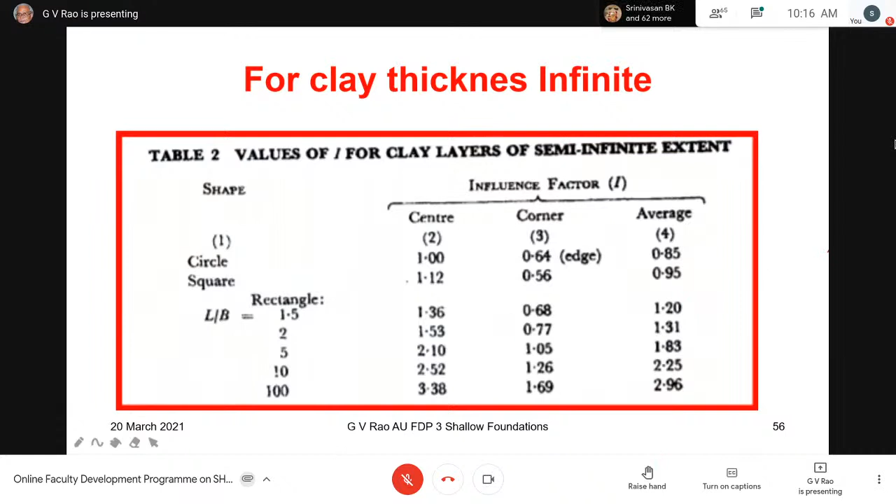The immediate settlement beneath the center of any load area follows the same equation, and for clay we assume 0.5, using an influence factor. This depends on L and B, and this table is also given from the same code. The influence factor depends on the kind of foundation, the shape, and whether at corner or center, and average values are given too, so we can determine the immediate settlement for clay.

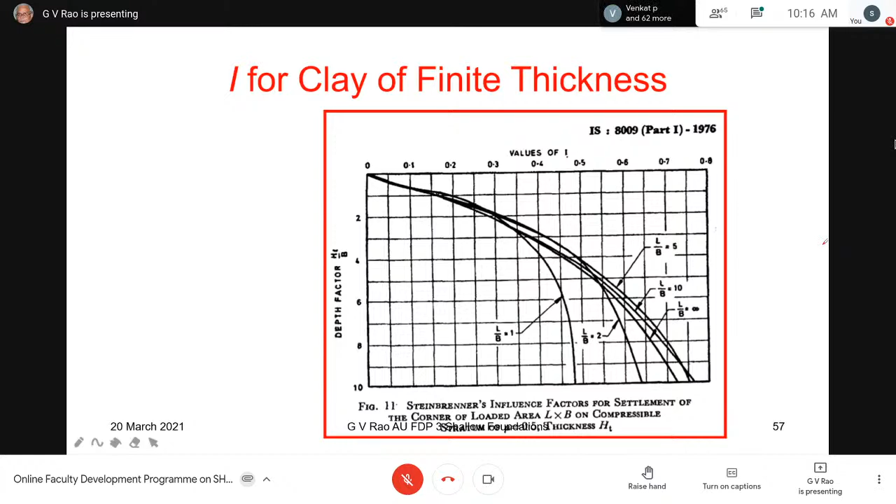This also needs to be corrected depending upon finite thickness. So these corrections are known as the Steinbrenner influence factors, and this is also part of the code. I don't think I will go into detail of this now.

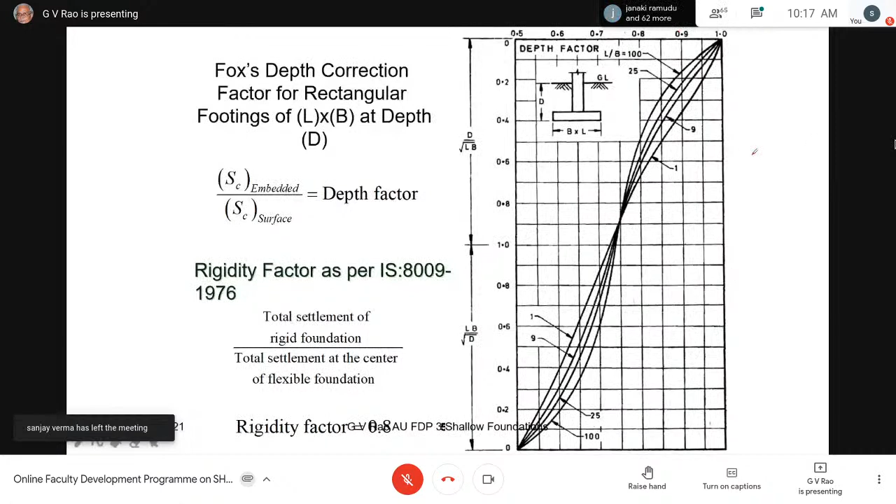We also need a correction for depth. This is given for rigid foundations, and these values ultimately depend again on the shape and the depth of the foundation. This correction is called the depth correction factor, and the chart is also given in the code. I'm not going to emphasize too much on this now.

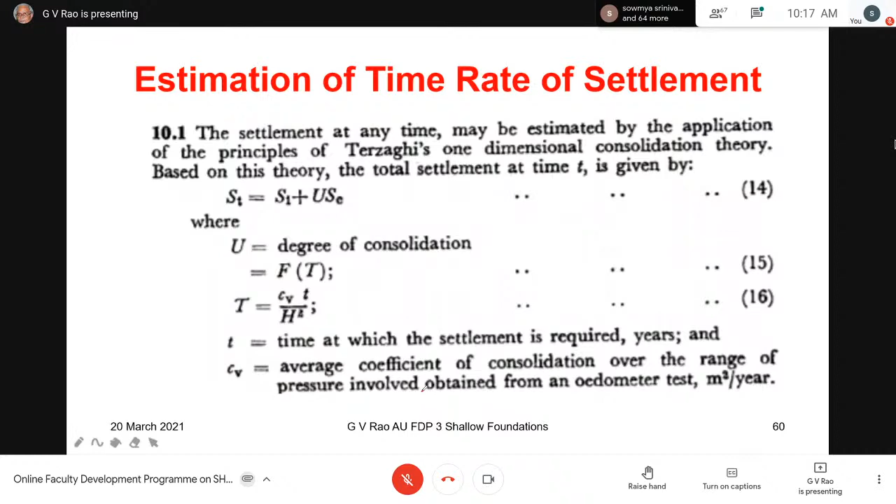So finally we get the immediate settlement, plus we can calculate the settlement at a given time. Given time means we take a 50% degree of consolidation, or we can find out within a given time how much consolidation occurs, taking degree of consolidation as a function of time factor. The same theory proposed by Terzaghi is used for consolidation times settlement.

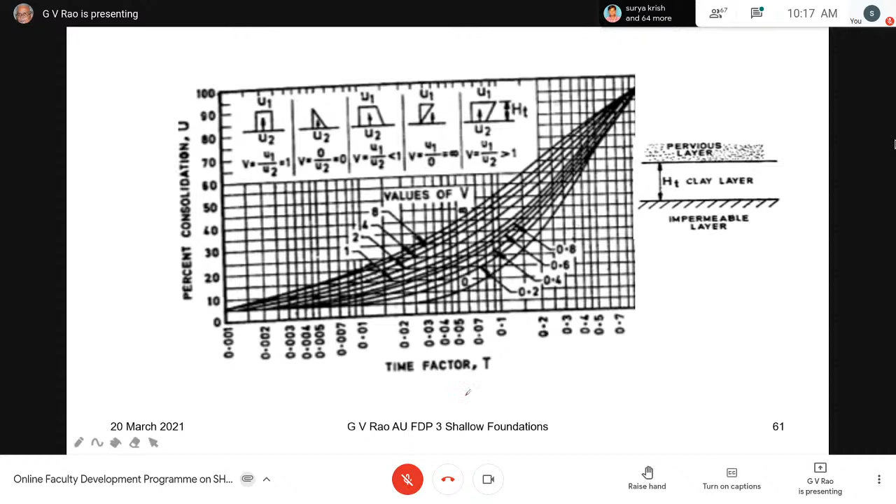This is the original curve by Terzaghi for different isochrone distributions. Looking at the topmost curve, it gives you a U-T relationship, which is simple, for isochrone distribution that is the same from top to bottom. This is the most common thing we try to use.

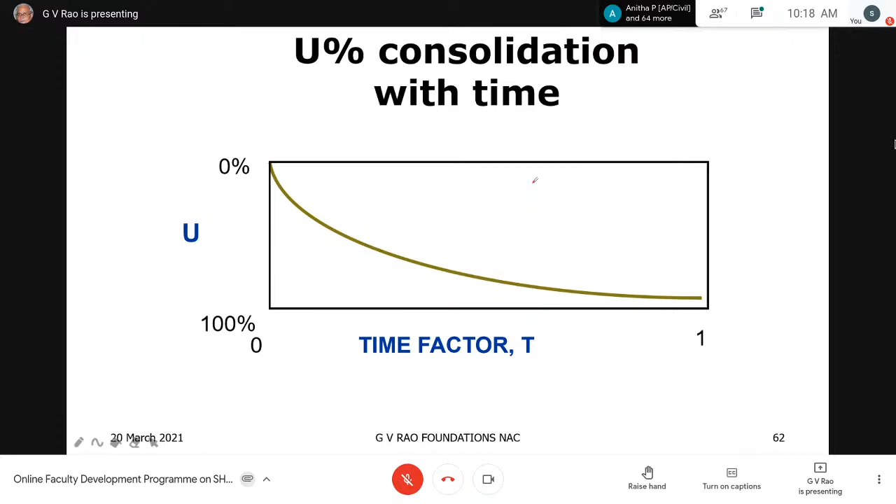So if you want to find out the amount of consolidation that occurred, you can find that, or if you want to find the time for how much settlement is occurring, both ways you can play with these equations to get an idea of how long it takes for settlement, or how much settlement occurs in a given time.

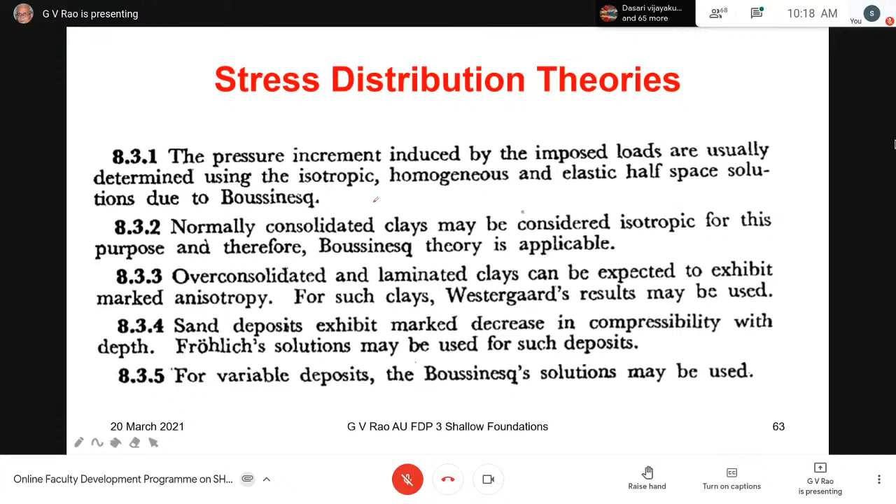The most important remaining part is the distribution, how the stress from the foundation is distributed over the layers. The recommendation of our code is to use Boussinesq's theory for normally consolidated clays, Westergaard for laminated clays, and Fröhlich equations for sand, but most commonly we use only Boussinesq. So for different deposits, we try to use this accordingly.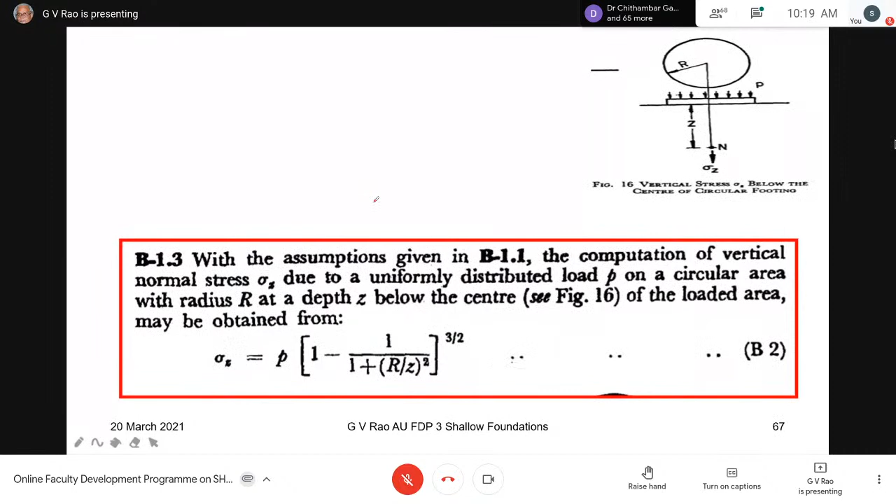This is based upon all the common approaches we use. We also have numerical charts given for this, but today we won't go into that because we have simple numerical solutions available, or we can develop an Excel sheet for this.

So all this brings us to the calculation of settlement for a given load or pressure, using the allowable or safe bearing capacity values. How much settlement are we going to allow? That depends on the type of soil, type of foundation, and the structural frame used for the structure. The limiting values can be anywhere between 20 to 300 millimeters, and the IS code on foundations - there are two codes we have used so far.

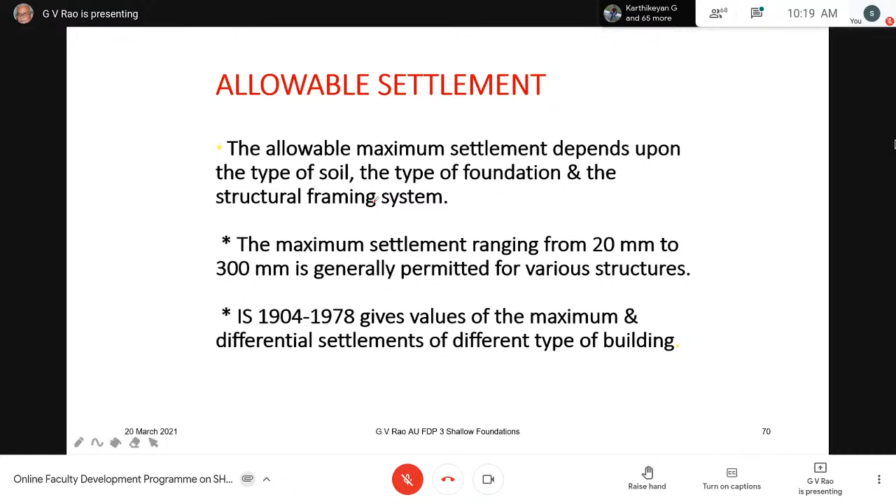We use one code for bearing capacity, another for settlement calculations, but there is another one which gives you how to design foundations. In this one, apart from total settlement, it also gives you the differential settlement. That is straight from that code.

What we are finding is for different isolated foundations for steel structures and RC structures, raft foundation for steel and RCC, sand and clay, plastic clay, we have got the maximum settlement, differential settlement, and angular distortion.

It requires a lot of time for me to explain all of them, but we have to work with these things always. Depending on the kind of structure, we have to see what is the maximum settlement, which means the total settlement.

Now how to calculate the differential settlement between adjacent footings - that depends upon the spacing between the columns.

Certain structures are more tolerant to differential settlement. The distortion allowed in a steel structure is more than what is allowed in RC structures. All this common sense we are going to use. All these values are only based upon experience - there is absolutely no theory behind this.

You will realize that the settlement we are going to allow for a raft foundation is as much as 100 millimeters in plastic clay. For the same raft in sand and hard clay, we are allowing 75. All this is based on experience only. For normal foundation, we say 50 to 75 millimeters.

If you have different columns having different loads, naturally they will have different sizes of footing, and so adjacent foundations may have differences in the settlement values. So we are looking not for total settlement, but for differential settlement and distortion - that is something very important.

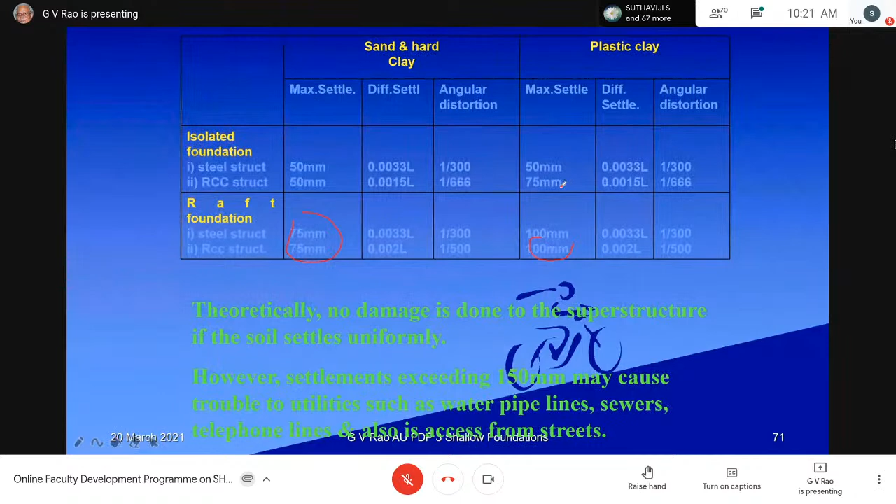These guidelines are given in IS 1904, reaffirmed in 2006. Some aspects we have to see - it gives you the reasons for how to locate the depth of foundation. I'm not going to list this now, but one should go through this code because they have illustratively mentioned the ways in which you define the depth of foundation.

The first reason is securing adequate allowable bearing capacity. What do you mean by this? If you keep going down in a C-phi soil or a phi soil, bearing capacity is going to increase - though not for a pure clay, which we have to remember from our calculations earlier. So if you've got a phi soil or C-phi soil, the more depth you go, the bearing capacity is going to be more. So we may have to go deeper to increase bearing capacity.

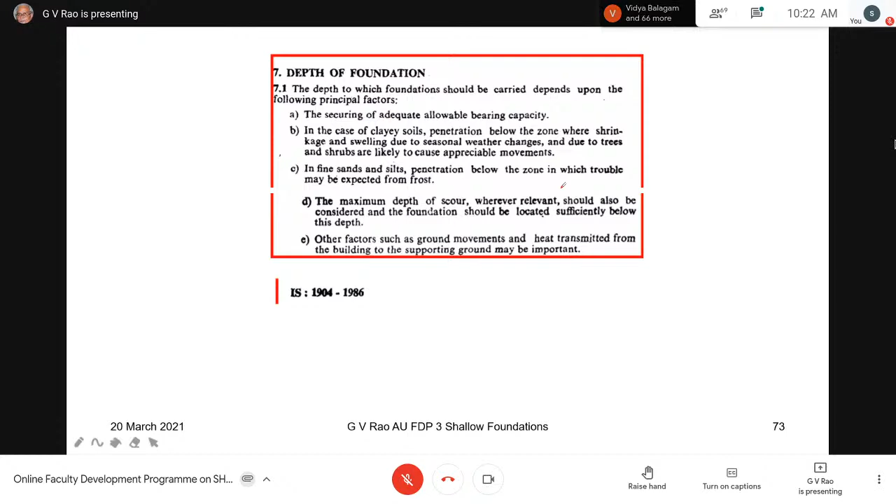Other reasons are there too, which I mentioned - one has to go through this.

What about the loads now? In terms of loads, we already know we have dead load, live load, dead load plus live load plus wind load plus seismic load. Now which part of the load do we take for calculations of bearing capacity as well as settlement? It's very important for us to look into this.

As the code says, live loads from the floors above as specified shall be taken in proportioning and designing foundations. Where wind or seismic load is less than 25% of that due to dead and live loads, it may be neglected in design. This combination of loads shall be compared with the safe bearing load to satisfy the allowable bearing pressure. They are giving details like this - one has to go through this.

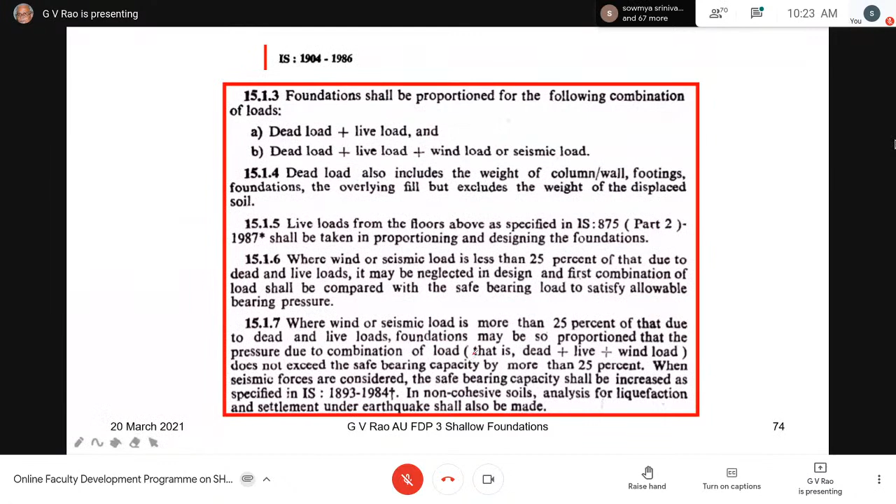I will illustrate only what is going to happen with respect to settlement. So settlement, as we already said: elastic compression, consolidation, groundwater lowering, seasonal swelling, ground movement on earth slopes is required sometimes, and then ground change and other causes - adjacent excavation, mining subsidence, underground erosion.

When this code was written, probably these problems were not there. Today, all these problems are occurring. There are cases when buildings settled because of lowering of the water table due to excess pumping. There are many cases in Hyderabad, and maybe in Visakhapatnam also, wherein adjacent buildings, when new construction tries to go deeper, the existing buildings are having distress.

This becomes very important for us. Many failures, I remember, occurred in Bangalore, Visakhapatnam, and Hyderabad, and they have to be prevented by doing many other techniques and gimmicks, which are very expensive now. Also, we know the problems of black soils, the swelling and shrinking clay, and tree plantation effects are affecting things in a big way.

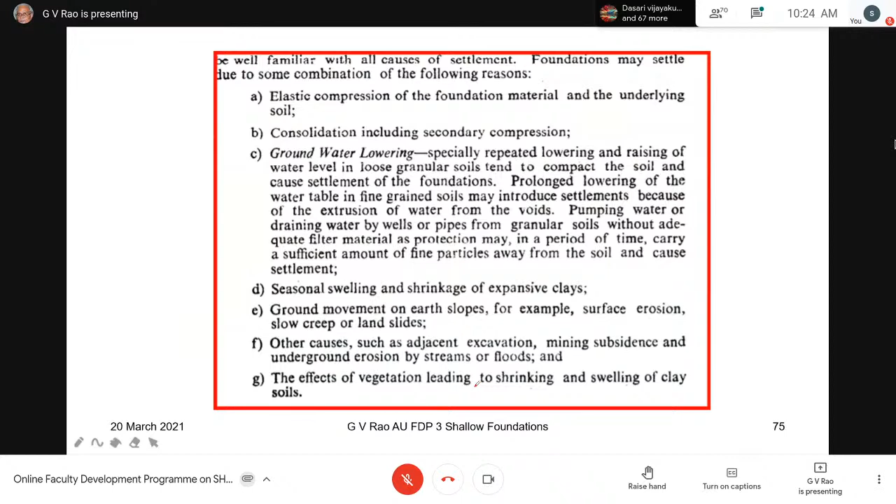The point is, please don't take this as a list of things. These are becoming relevant today, and we have to consider this now. They are not present in the form of an equation, and because they are not present in the form of an equation, we can't afford to neglect them, or there's only going to be unsatisfactory results.

The other point I mentioned was, when we have adjacent foundations, there is a possibility of differential settlement occurring. We can't afford to have this much different settlement just because the column loads are different. Column loads are going to be different because the central column has a different kind of load, the outer columns have a different kind of load, and the columns underneath the staircase and the lift are going to have different loads. So this is unavoidable.

To manage this, there is a criteria given by the code itself. What it says is that we try to reduce the differential settlement due to live loads only. So for fine grained soil, the settlement shall be estimated corresponding to permanent loads. There is no problem at all.

Dead load and all fixed equipment are considered permanent. Generally, one half of the design live load may be taken as being permanent. If you go to a live load building, it's not one-half, it may be three-quarters also. So that means permanent load is going to be the dead load plus part of the live load.

So that is what is now defined as the service load. In the service load, what do we do? We pick up a column and determine the required bearing area for a column having the largest live load to dead load ratio. In the conventional method of design, we got the allowable bearing capacity, and we got the dead load plus live load for the maximum case, and then we determine the area for this.

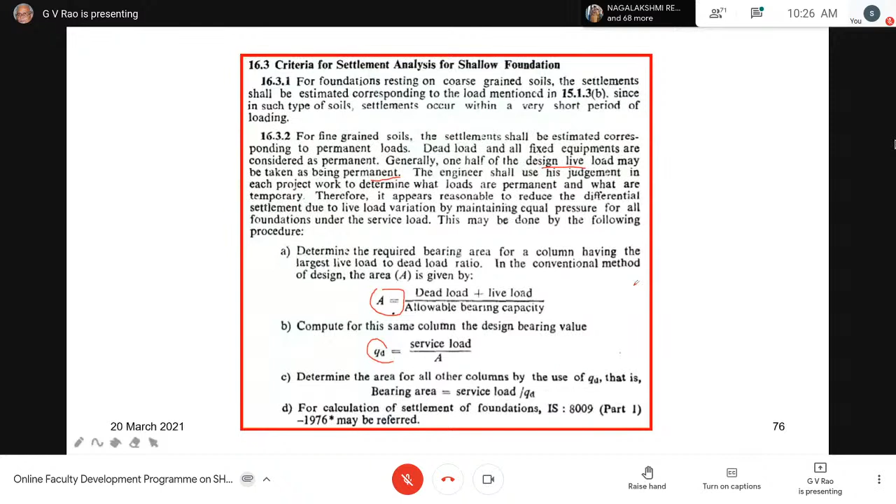Hope it works, but it's definitely better than anything else. So there is a change which we are going to call for. The other thing to remember: whenever you have a single column and the top soil is hard, if the foundation is near the surface, the failure plane is going to be within the hard soil. But if you have a deeper foundation, this failure zone can also get into soft clay, and that leads to problems.

He finds that by lowering this entire structure by 15 feet, we are not placing an extra load—in fact, we are lowering the load itself. That means we've got free bearing capacity, and that is what we have to really see. But the construction sequence is going to be very important, not just the calculation. One has to see that basements are useful in reducing the actual load on the structure and on the foundation soil, and sometimes some of the hotels have got large tower structures.

These large tower structures maybe it's worth having two basements, and for other lesser floors, naturally we can have one basement. So this decision we have to make now.

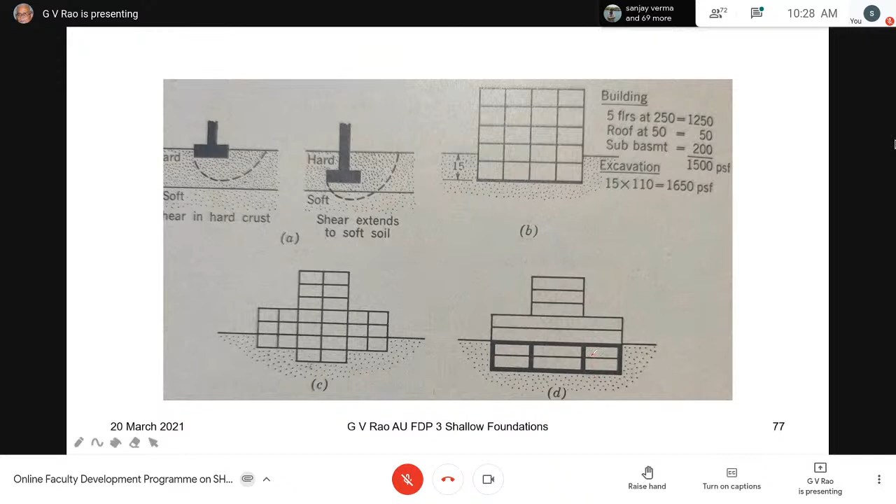Some cases can also have a block like this, meaning the whole thing works as a single block. It depends upon many things you are going to do, and so the structure variation can be there out of this.

Then there are many other things which you have to look at in a classical way. Classically, if the foundation bed capacity is not sufficient, we have to change the foundation, that means from shallow to deep we go, or we provide an adjustable transition between the soil and the structure.

Like in the Palace of Fine Arts in Mexico, there are people who put some kind of systems at the bottom, like jacking, because we know the soil is going to inevitably settle to a large extent. So they provide a kind of jack-up system, so automatically it will keep jacking up the structure. Of course, it's a design structure.

We considered changing the superstructure, and then we say change the soil, meaning change the location. Change of location was an option earlier, but today we can't do anything because the land is premium. Once you've got the land, you want to use it for building a bridge, a metro track, multi-story buildings, or commercial buildings. So change in soil location is not appropriate.

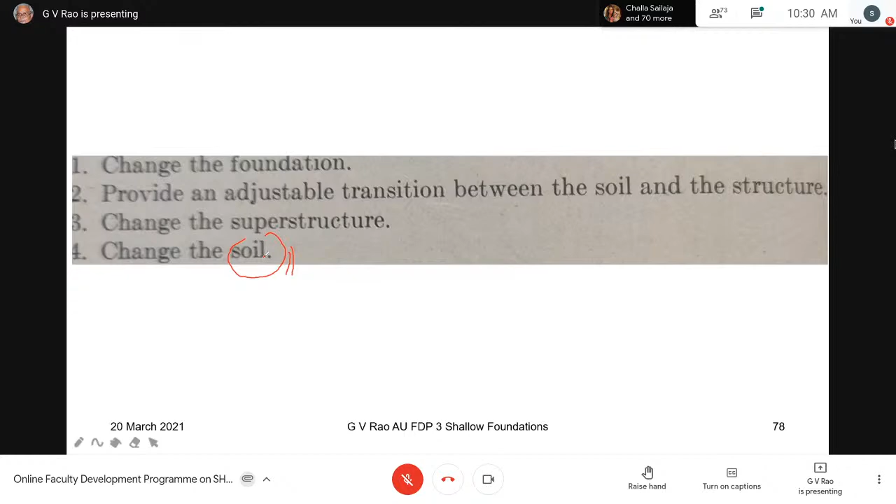Yes, you can change the soil behavior by improvement. That's what probably Professor Madhav and I will deal with towards the end of this entire FDP. So it's not change in soil meaning change the location, but ground improvement may help sometimes, though it could be slightly costly or time-taking. This is something we have to remember.

So this is what we said when we started. This is the same Palace of Fine Arts, which has sunk more than 4.6 meters in 100 years, and it is still sinking. So the result is that now when we are going up the staircase, up the steps for the portico, we are actually taking steps to go down.

All the parking lots, everything is in a reverse way, the cars are parked in reverse. So the point is that the structure as such is fine, but the aesthetics is gone. They have to rework everything, all the electrical lines, water lines, sewer lines, everything has changed.

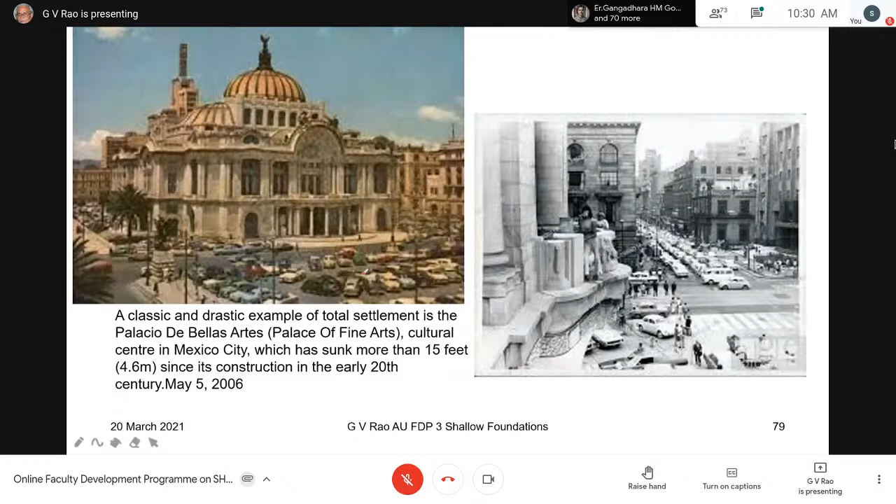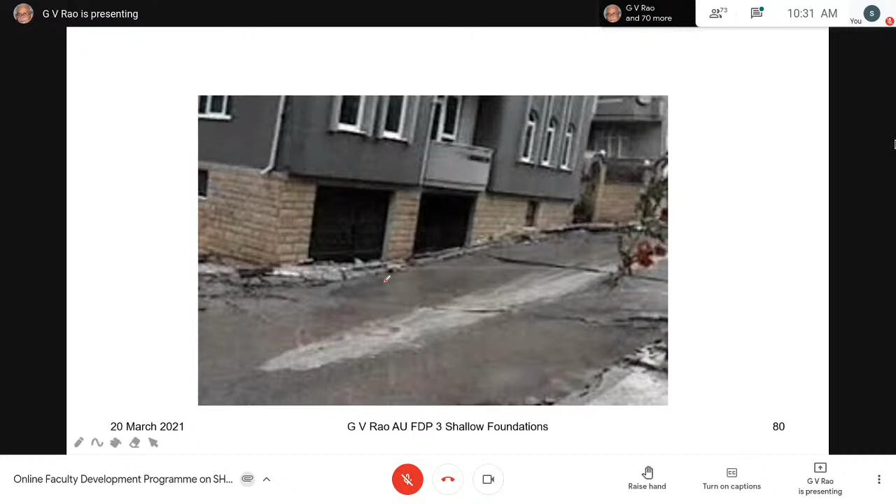That is the beauty of the structure, structure is intact, but it settles so much and continues to settle. And if that happens, obviously even the roads and everything else around the structure is going to be changed. In Mexico, this very special case shows that the settlement is going to move.

Another thing to say, when you have large structures, huge structures, say 100 meters by 20 meters wide, like all the modern colleges and self-financed private colleges, they have huge structures. Now if they are on clay, what's going to happen? It's going to give us a distribution like this, so there's a bowl-shaped settlement.

So what's going to happen to the tracks here, and to the entire settlement? If the soil is not uniform, meaning thick somewhere and thin somewhere else, naturally it leads to uneven settlement. And if you've also got a neighboring tower or something like that, naturally that is going to tilt.

If that happens for a bridge foundation, naturally if this abutment is going to move this way, the deck slab is going to fall down. If the abutment moves towards the bridge, obviously there is stress being created here. So that is something we have to remember, the problem either way. In this kind of case, the entire structure is going to crack like this.

Okay, and it may also compress. The compressed stress will be coming out, and here the crushing will be happening, and then cracking like this. And also, if it is a structure like this, a frame structure, there will be cracks at the sides also.

And if the movement is the other way around, this kind of thing happens in swelling soils, we find cracks like this. This happens due to the continuous change in moisture content and deposition of water here. Many things are happening in the black cotton soils.

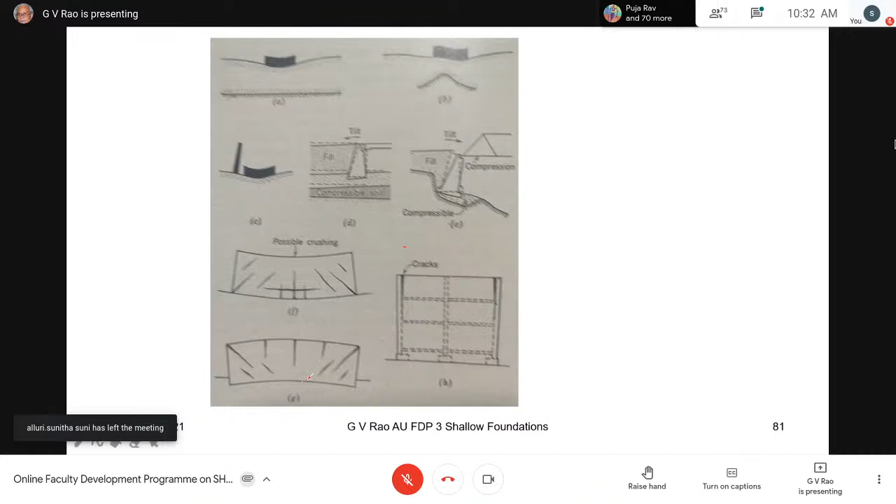You find that it's not just calculation of the settlement for individual footings. It is going to be the total structural performance of the entire structure, and things like this are going to be very important for us. So gentlemen, this is what I wanted to cover in principle.